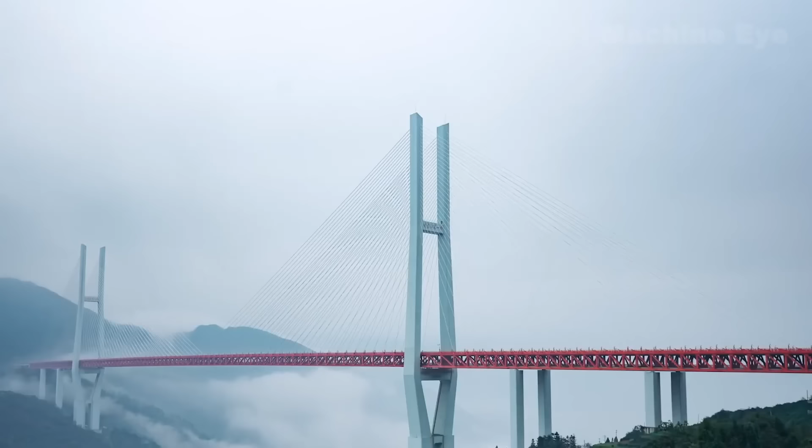Have you ever wondered how, in just a few decades, China transformed from having nothing into a global infrastructure powerhouse? The answer is hidden in this land bustling with activity. China, hailed as the infrastructure maniac, Chinese engineers have written their own legend through a series of world-shocking megaprojects. The once arrogant United States, upon witnessing China's true infrastructure might, had no choice but to bow down. They knew that many of the projects China built were simply beyond American capability.

Former US President Trump once openly declared that America would never be able to compete with China.

I love China. People say, oh, you don't like China. No, I love them. But their leaders are much smarter than our leaders. And we can't sustain ourselves. China, you go there now, roads, bridges, schools, you never saw anything like it. They have bridges that make the George Washington Bridge look like small potatoes. And they're all over the place.

When it comes to constructing large-scale projects, China literally clears mountains and builds bridges over waters, forging ahead through every obstacle just to create one engineering marvel after another. So, just how incredible is China's strength in infrastructure? And what untold secrets lie behind the nation's cutting-edge construction technology for mega-projects? In this video, we will delve deep into the stories behind China's giant engineering feats.

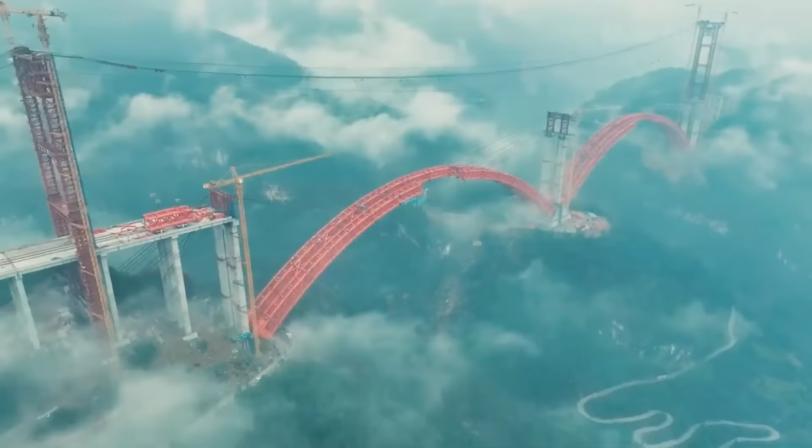As one of the world's largest developing countries, China has long driven its economic and social development through infrastructure. Its engineers are like superheroes in the field of construction, dedicated to creating monumental projects that meet the demands of a continually growing population. From the Baihetan Hydropower station rising from the banks of the Jinsha River to the spiraling tunnel of the Yaxi Expressway that seems to float among the clouds, from the world's highest Qinghai-Tibet Railway to the Hong Kong-Zhuhai-Macao Bridge spanning the Lingdingyang, from the hellish difficulty of the Sichuan-Tibet Railway to the 50-meter deep tunnel under the Pearl River estuary, Chinese engineers have redefined the limits of human infrastructure with projects once thought impossible.

While Americans were still embroiled in debates over repairing century-old bridges, China was reshaping the surface of the Earth by constructing 16,000 kilometers of highways and 4,000 kilometers of high-speed rail each year. When China's railway network in 1949 measured only 21,000 kilometers, with half of it in disrepair, who could have imagined that 75 years later, the nation would weave a traffic network spanning 45,000 kilometers of high-speed rail and 180,000 bridges, enabling people to travel thousands of miles in a single day?

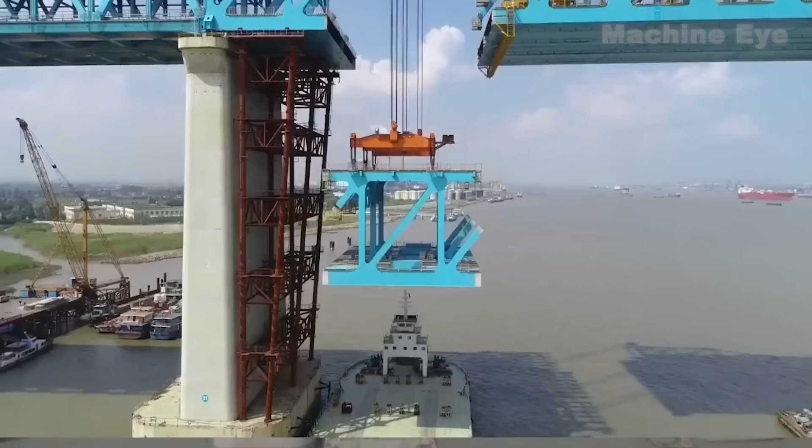Behind these achievements lies an Eastern wisdom that has upended Western perceptions. During the construction of the Hutong Yangtze River Bridge, China developed a specialty steel possessing a tensile strength of 500 MPa, equivalent to a steel cable as thick as a chopstick lifting 3 main battle tanks. This breakthrough in material means that a cable-stayed bridge designed for both road and rail, with a 1,092-meter main span, is no longer merely a theoretical concept. As the world's first road-rail cable-stayed bridge with a main span exceeding 1,000 meters, it not only serves as the golden link of the Yangtze River economic belt but also stands as the pinnacle of Chinese infrastructure innovation.

The bridge features a main span of 1,092 meters, with two 330-meter high diamond-shaped main towers soaring into the sky, equivalent in height to a 110-story building. These towers bear an axial force of 300,000 tons, functioning like the mythical sea-calming needle that stabilizes the waters, their foundations firmly anchored in the riverbed.

To conquer the complex hydrological environment of the lower Yangtze River, engineers pioneered a groundbreaking precision positioning technology for a 15,000-ton steel caisson. They constructed a colossal caisson foundation spanning 5,100 square meters on the dynamic, sediment-laden riverbed, equivalent in area to 12 basketball courts, setting a world record.

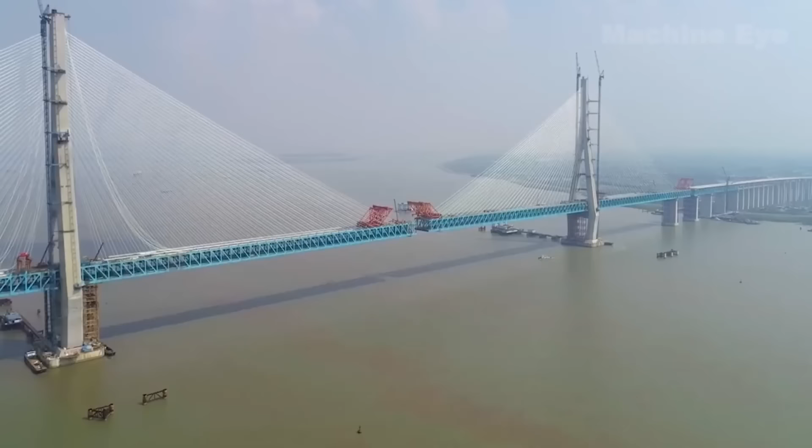The bridge employs self-developed ultra-high-strength steel that surpasses conventional materials in strength, paired with 2,000 megapascal grade stay cables. This steel and concrete framework supports a superload of 480,000 tons of steel and 2.3 million cubic meters of concrete, equivalent to the steel used in 12 Bird's Nest stadiums and the concrete volume of 8 national grand theaters.

By reducing the travel time between Nantong and Shanghai from 5 hours to just 1, the Hutong Yangtze River Bridge has revitalized the Yangtze River Delta's transport network, effectively unblocking the region's critical arteries like the meridians in traditional Chinese medicine. The bridge carries the Tongxi Expressway, Husutong Railway, and Tongsujiayong high-speed rail, handling over 100,000 vehicles daily and 80 million tons of annual freight, forming a super corridor linking coastal economic zones.

Its 1,092-meter-wide main channel accommodates 100,000-ton vessels, achieving harmonious coexistence of maritime and land transport. International netizens marveled at the spectacular steel beam closure process.

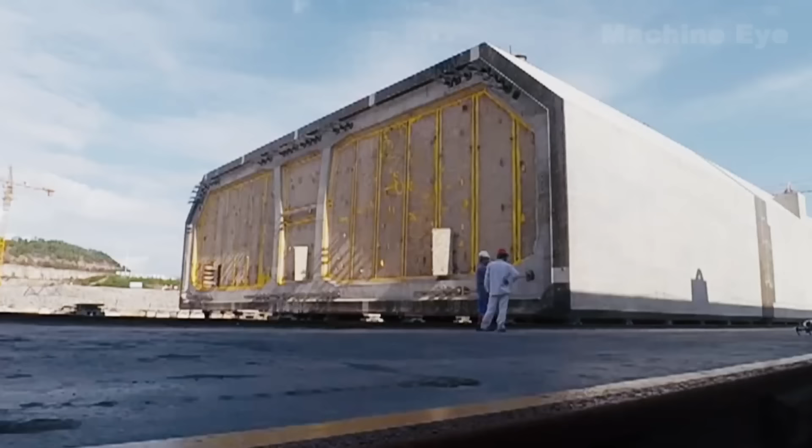At Zhuhai's Niutou Island, in the world's largest immersed tube prefabrication facility, 33 massive tube sections were quietly produced. Each section is 180 meters long and weighs 74,000 tons, comparable in scale to a medium-sized aircraft carrier. Engineers pioneered the curved immersed tube factory method, fabricating curved tube sections with a radius of 5,500 meters to millimeter-level precision, breaking free from the limitations of straight-line production.

Once towed from the prefabrication yard to the construction site, these tubes must navigate complex ocean currents. A formation of 8 high-powered tugboats, coordinated by satellite positioning and an intelligent control system, precisely delivered each tube section into position. Then, harnessing the buoyancy of water, the immersed tube gently descended 44 meters to its seabed foundation trench. Through China's independently developed deep-water unmanned installation system, an astonishing joint tolerance of merely 3 millimeters was achieved between tube sections, a precision feat lauded by international media as 'the subsea kiss of perfection.'

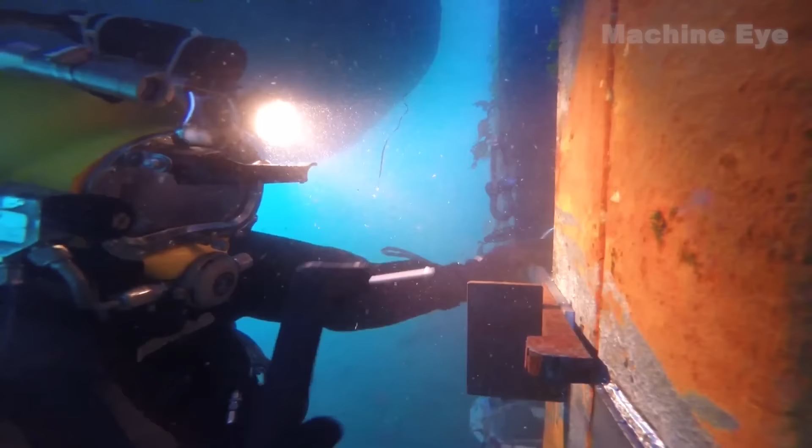Traditionally, immersed tubes rely on risky underwater welding to ensure watertight seals. Chinese engineers pioneered a revolutionary active compression sealing technology. They installed retractable steel bulkheads at tube ends, employing hydraulic systems to actively compress rubber gaskets, transforming manual processes into mechanized operations that guaranteed absolute water impermeability.

This innovation enabled the final joint installation to be completed in just 1 day, achieving a 10-fold efficiency improvement. To monitor the immersed tube's positioning, engineers deployed high-precision, microelectromechanical gyroscopes and tilt sensors, capturing ultra-low-frequency motion data in real time. This ensured the 33 tube sections fit together with the precision of interlocking building blocks.

At both ends of the tunnel, the artificial islands feature steel cylinder retaining structures. 120 steel tubes, each measuring 22 meters in diameter, are driven deep into the seabed, forming a robust foundation that withstands ocean currents and typhoon forces.

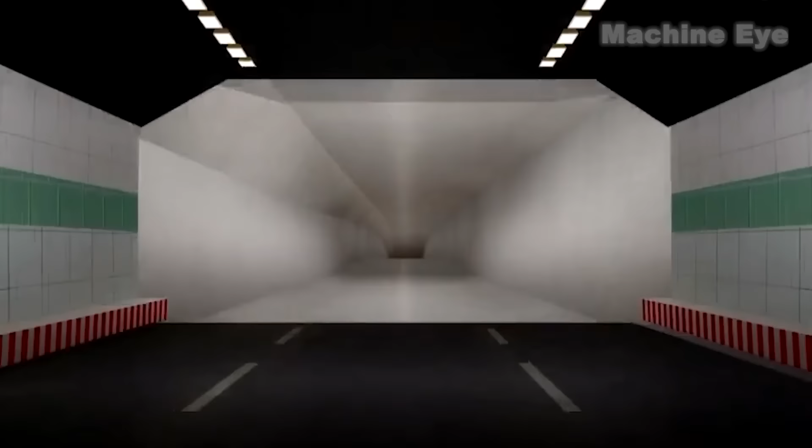From the Øresund Strait in Denmark to Busan in South Korea, no immersed tunnel worldwide had ever exceeded 3.5 kilometers until the Hong Kong-Zhuhai-Macao Tunnel rewrote history with its staggering 6.7-kilometer span. International media marveled: 33 colossal tubes aligned on the seabed with a cumulative error less than the width of a human hair. Chinese engineers have redefined the limits of deep-sea engineering.

More than a physical passage, this tunnel symbolizes China's transformation from an infrastructure follower to a standard setter. Through this 6.7-kilometer undersea marvel, China demonstrates that its engineering prowess can tame the vast oceans, inscribing a new chapter in the annals of human engineering.

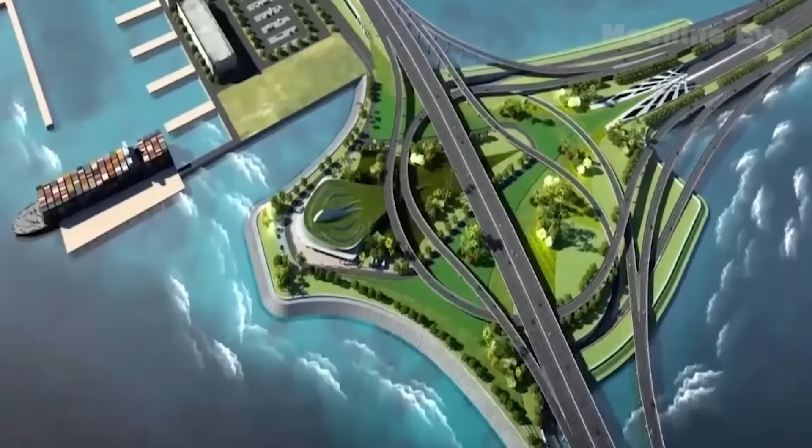In addition, Chinese engineers have constructed another colossal engineering project that has astonished the world: the Shenzhen-Zhongshan Link, an engineering colossus spanning turbulent waters. A core transportation hub project in the Guangdong-Hong Kong-Macao Greater Bay Area, stretching 24 kilometers in total, this project is an integrated cross-sea engineering feat combining bridges, islands, tunnels, and underwater interchanges, including an undersea tunnel that spans approximately 6.8 kilometers.

In this tunnel, engineers embedded 23,000 fiber optic sensors within the immersed tubes, allowing the concrete to sense stress changes in real time, much like human nerves. This technology is 40% more sensitive than its Western counterparts, prompting even the journal Nature to exclaim, 'The Chinese have taught concrete how to think.'

Next, we will examine in detail how Chinese engineers built this undersea tunnel. This tunnel, 6.8 kilometers long, is designed with 8 lanes in each direction, 2 more lanes than the Hong Kong-Zhuhai-Macao Tunnel. It is composed of 32 giant immersed tubes and a final joint, buried more than 40 meters beneath the sea. When Dutch immersed tube specialists declared an 8-lane bidirectional configuration impossible, Chinese engineers staged a subsea engineering marvel in the Pearl River estuary.

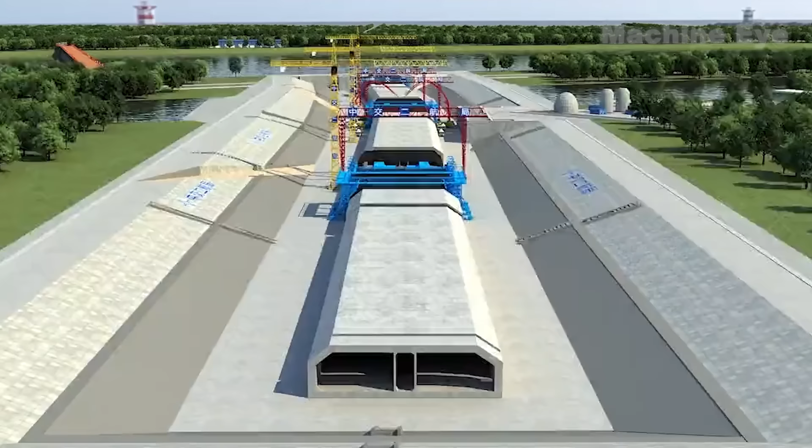Deploying an innovative steel-concrete sandwich composite structure that defied Western engineering conventions, Chinese engineers overcame the challenge. Traditional immersed tube tunnels typically employ cast-in-place reinforced concrete, a process that is both labor-intensive and time-consuming.

For the Shenzhen-Zhongshan Link's undersea tunnel, engineers adopted a steel shell design. However, the 8-lane configuration significantly widens the tube structure, with each additional lane increasing hydrostatic pressure by 27%, approximately 20,000 metric tons per lane. This equates to bearing the combined weight of 15,000 sedans. Compounding this challenge, the overhead navigation channel accommodates 10,000-ton cargo vessels. The dual pressures from hydrostatic forces and shipping loads create a structural conundrum akin to crushing forces on a beverage can, potentially causing tunnel deformation.

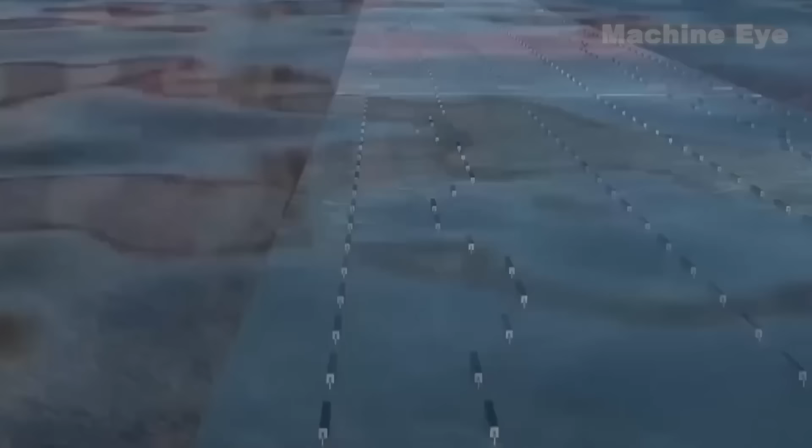After thorough research and verification, Chinese engineers decided to use a steel shell concrete structure. The process begins with fabricating the tube's steel shell, followed by concrete infilling, a composite construction method that significantly enhances compressive strength while eliminating traditional rebar tying. This innovative hybrid structure achieves a 400% increase in flexural rigidity, a breakthrough so transformative that the American Society of Civil Engineers has incorporated it into their latest design specifications.

The immersed tube is manufactured in an automated facility, where steel plates are precision cut into various profiles, then robotically welded. Intelligent welding robotic arms achieve 0.02 mm seam alignment accuracy, the error being only a third of a human hair's thickness. Certification testing by Germany's TÜV Rheinland confirms that the weld quality exceeds DIN 6700 standards by 22%.

Due to their enormous size, each tube is divided into 22 segments. After each segment is completed, a gantry crane assembles them, followed by final assembly work by the crew.

Besides the robust and watertight exterior, ensuring that the tube remains corrosion-free for 100 years underwater is key. After the steel shell is completed, its surface is sprayed with 5 layers of anti-corrosion coating with a molecular structure that mimics shark skin, leaving no foothold for algae or bacteria. Each tube is then equipped with 552 sacrificial anodes, ensuring that under their protection, the tube can be safely used for a century. Next, the tube is transported to another facility for the final concrete pouring.

The underwater immersed tubes of the Shenzhen-Zhongshan Link are designed with a steel shell concrete structure. Once the steel shell is completed, its inner chamber is filled with concrete. The total volume of concrete for 32 tubes exceeds 1 million cubic meters.

At this point, manual labor could no longer keep pace, necessitating the use of intelligent concrete pouring robots. These robots autonomously move along predetermined routes on the tube's top slab, automatically detect and drill holes, and perform the pouring operation entirely on their own. Using 1,200 sensors to continuously regulate the concrete's flow rate, these smart robots compressed a process that traditionally took 90 days into just 28 days.

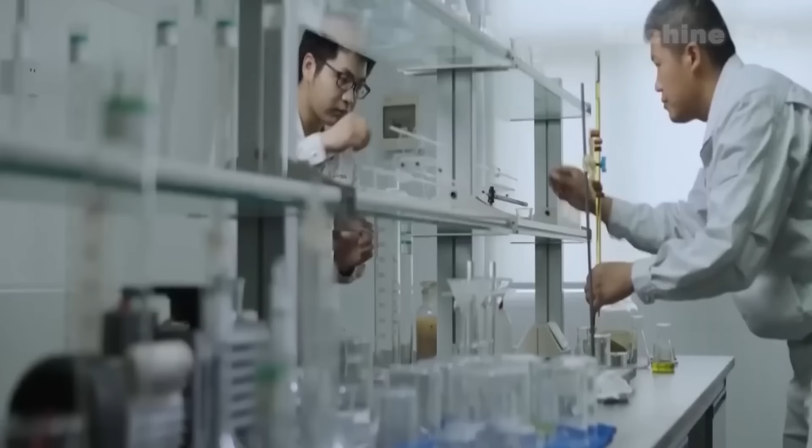Even more astonishing is the zero manual vibration technique. Self-compacting concrete flows like melted dark chocolate into every crevice with nanometer-level precision, comparable to the intricate distribution of capillaries in the human body. To formulate the optimal composition ratio, engineers dedicated 3 years to systematic experimentation, even building a full-scale tube module to simulate the tube's ability to withstand more than 1,000 typhoons and resist a level 9 earthquake.

The tests also simulated a scenario in which sea levels rise by 3 meters by 2075. This die-before-rebirth Eastern philosophy reduced the project risk by 83%. These simulation tests effectively validated the reliability of using this specialized concrete in the immersed tubes.

Although this concrete's strength and flowability meet the requirements for casting the tubes, once it leaves the batching plant it must be poured within 90 minutes. This critical requirement led to the creation of an intelligent manufacturing facility capable of casting 1 tube section per month, earning its reputation as the Smart Dream Factory for immersed tube prefabrication.

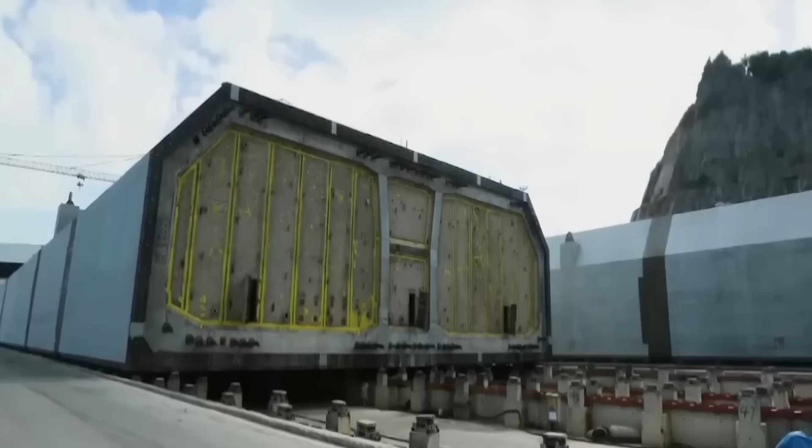A complete steel shell immersed tube weighs as much as 80,000 tons. Moving it a mere 200 meters to the departure area is no small feat given its massive weight. With 200 transport vehicles and over 1,000 steel wheels, the 80,000-ton tube was slowly moved and transferred in just 4 hours, a task that used to take 7 days for a tube of similar mass.

Before a tube can be brought in or out, workers must conduct final inspections. Using millimeter precision, non-destructive testing equipment, the density of the concrete can be assessed without damaging the steel shell. Once approved, the tube is fitted with a ballast water tank and steel sealing doors, then maneuvered by buoyancy into a deep water dock. Next, it is ready for installation.

How do you excavate a 5-kilometer-long, 330-meter-wide deep-sea trench 40 meters below the surface? The answer lies in the choice of construction machinery.

In the undersea tunnel section of the Shenzhen-Zhongshan Link, the seabed is scattered with uneven weathered rock. Before laying the immersed tubes, the seabed must first be leveled. This is where specialized drilling tools come in. A 35-ton drilling hammer, weighing as much as 3 main battle tanks, free falls to shatter granite.

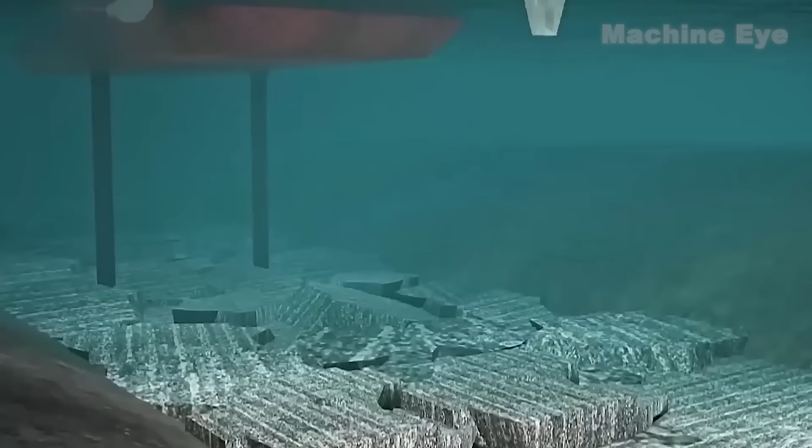Each impact releases energy equivalent to 2.5 kilograms of TNT, yet it can control the trench's precision within plus or minus 4 centimeters, more stringent than the installation standards for benches in New York's Central Park.

Meanwhile, another vessel uses a powerful grab bucket to clear out rubble. If excavating the trench is like laying a bed for the tubes, then throwing and leveling stones is like adding a mattress, a crucial step to ensure the precise alignment of the tunnel's tube sections.

The Jinping No. 2 leveling vessel is the star of this phase. Upon reaching the exact location of the tunnel, 70-meter-high support pillars are driven into the seabed for positioning, and rubble is transported via conveyor to the stone-laying pipe. The discharge outlet then lays the stone evenly at a regulated speed on the seabed, maintaining precision within 4 centimeters. Every 4 days, the leveling work for 1 tube section is completed.

Once the tunnel's trench is prepared, the world's first integrated floating and installation vessel, Jinan No. 1, sets sail carrying an 80,000-ton immersed tube out of the dry dock. At 1 o'clock in the morning, Jinan No. 1 successfully reached the lowering position.

Under the guidance of cables, the tube was slowly lowered until it reached the trench, where it was connected to the previous tube section via pole rods. To ensure installation accuracy, divers went underwater to transmit real-time images. After a final hour of fine-tuning, the deviation at the joint was reduced to an astonishing 0.8 millimeters, thinner than a human eyelash, breaking the world record for underwater immersed tube alignment.

Dutch supervisor Janssen recorded in his log, "This is the Apollo moment of engineering."

Now that the Shenzhen-Zhongshan Bridge is fully operational, a brand new landmark mega project spans the Pearl River estuary. When the first car's headlights pierced the darkness of the undersea tunnel, it was not just the rebirth of a transportation artery, but an epic dialogue between humanity and the ocean.

Chief Engineer Song Shenyou told reporters, "We spent 16 years turning a wild idea on paper into a routine reality that millions cross every day." Regarding this project, the chief engineer further elaborated.

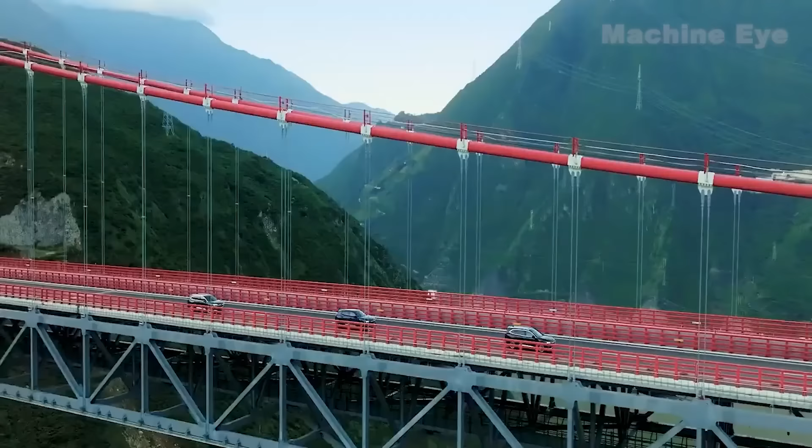With its global leading scale, complexity, and speed, Chinese infrastructure has become a shining national card that captures the world's attention. From the lofty Yaxi Expressway to the bridges and tunnels carving through the towering mountains of Sichuan and Chongqing, breaking 7 world records along the way, China has turned natural obstacles into thoroughfares for economic and social development, significantly improving people's livelihoods and paving the way for rural revitalization.

The Hong Kong-Zhuhai-Macao Bridge is the most technologically complex, challenging, and massive bridge in the history of road construction, setting multiple world records and establishing core technologies with independent Chinese intellectual property rights.

In 2024, with the opening of the Shenzhen-Zhongshan Bridge and the Huangmaohai Cross Sea Bridge, the Greater Bay Area will realize the one-hour living circle. Roads and bridges have shattered the constraints of time and space, fostering coordinated socio-economic development.

The expansion of China's railway network and breakthroughs in independent research and development have dramatically transformed the lives of its people. In a country boasting the world's largest high-speed rail and highway networks, traversing thousands of miles in a day is now a part of daily life.

Have you ever imagined that a ship could sail over mountains? And this isn't like something out of a movie or a dream, it's a reality. You can turn your fantasies into reality. And to do so, you must come to China.

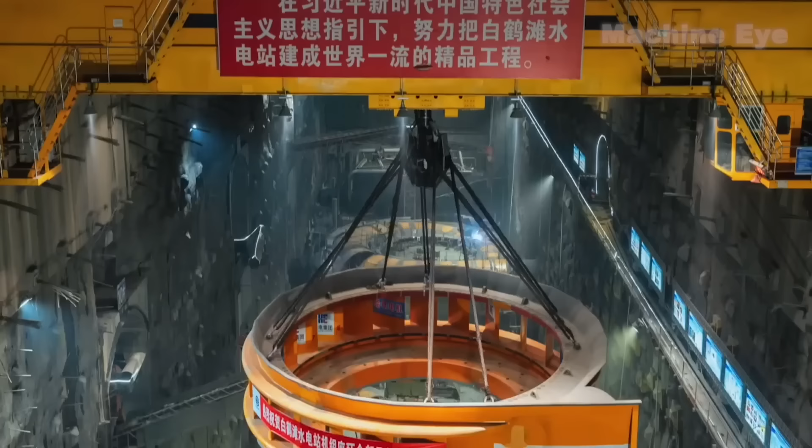In the modern world, all of this is only possible thanks to dams and hydropower systems. Approximately 1/3 of the world's installed hydropower capacity comes from China. This is not surprising, as there are countless hydropower stations in the country, some of which have even set world records.

For example, in China there is a dam called Baihetan, one of the largest hydropower stations on our planet, with an installed capacity reaching 16 million kilowatts. Its scale is enormous and its annual power generation is truly remarkable.

Although its installed capacity is lower than that of the Three Gorges Dam, it still ranks as the second largest hydropower station in the world. In fact, the world's top 5 hydropower stations are all Chinese projects.

In this country, people can actually make ships sail over mountains. In today's video, you will learn how Chinese engineers accomplished this feat.

They used ship lifts to turn fiction into reality. This is the Goupitan hydropower station.

The dam stands 232.5 meters tall, and the total lift height of the ship lift reaches 199 meters, equivalent to 66 stories. Ships are raised in 3 vertical stages to bypass the dam, traveling directly from the lower to the upper reaches of the Wujiang River, making it one of the world's largest ship lifts.

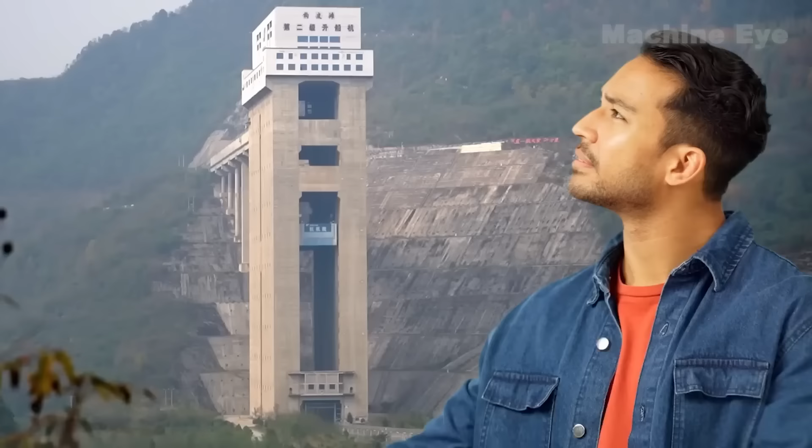So how does this ship lift actually operate? First, a 500-ton vessel enters a gigantic ship-carrying chamber measuring 40 meters in length and 12 meters in width. The chamber is flooded with water to create a moving waterway. It is towed by 256 steel cables and is raised and lowered vertically via a gear rack climbing system, with each stage taking about 30 minutes.

The ship must ascend through 3 levels of the ship lift, taking a total of approximately 2.5 hours, reducing the journey by 4 days compared to traditional winding mountain routes.

Employing a world-first gear rack plus nut column safety system that can withstand an 8-level earthquake in extreme wind and waves, the lift's precision is maintained within plus or minus 10 millimeters, ensuring that 500-ton class vessels can traverse the mountains smoothly.

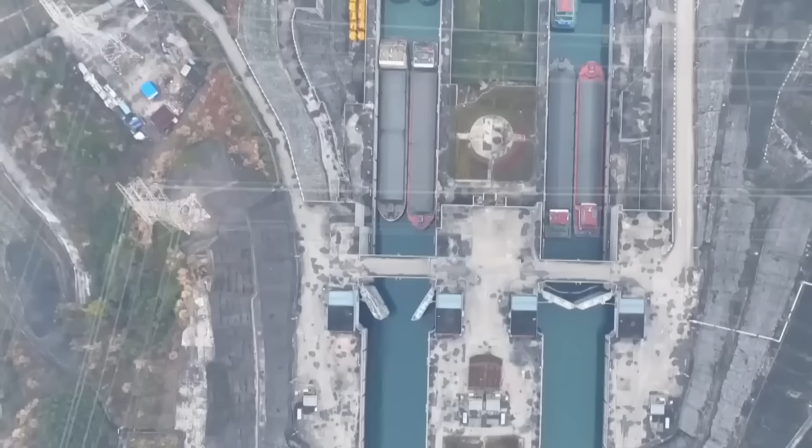This project has restored full navigation along the Wujiang River, opening up the golden waterway that connects Guizhou to the Yangtze River, increasing annual freight capacity to 5 million tons, and boosting the development of the Central Guizhou Economic Zone. The International Shipping Association has even described it as redefining the possibilities of inland navigation.

However, the designers claim that this ship lift can raise and lower a 500-ton vessel in about 10 minutes. In other words, a standard passenger ship can easily depart from its original position in such a short time.

The massive lift has a maximum load capacity of 18,800 tons. Even though a vessel might take a bit longer to be fully raised, hardly anyone cares because any waterborne vehicle will be lifted to an astonishing 72-meter height. Incidentally, this height can vary depending on the downstream water level, with a maximum lift of up to 200 meters.

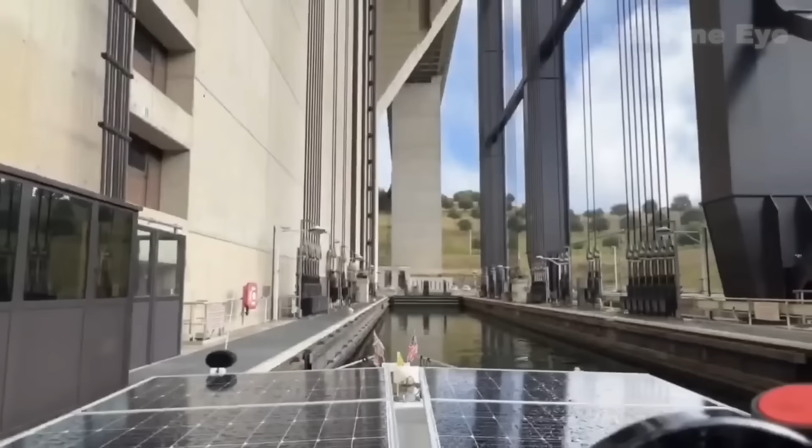Some have even called the ship lift system at the Goupitan Dam an incredible feat of engineering. Of course, such praise is open to debate, since ship lifts have been implemented in various parts of the world for some time. However, you will notice that this system does not consist of a single elevator.

It actually comprises 3. Following the first elevator is a second one that raises vessels to a height of 130 meters. Its operating principle is straightforward: the ship enters, waits for the system to activate, and is then raised as a whole.

Through the Goupitan Dam's lift system, the water surface of the entire shipping channel is elevated to 199 meters, simply unbelievable. To put this in perspective, the height to which a ship is lifted is equivalent to that of a 66-story building. If you were near the Great Pyramid of Giza, you'd see that its height is 139 meters, while the Statue of Liberty in the United States stands only 93 meters tall.

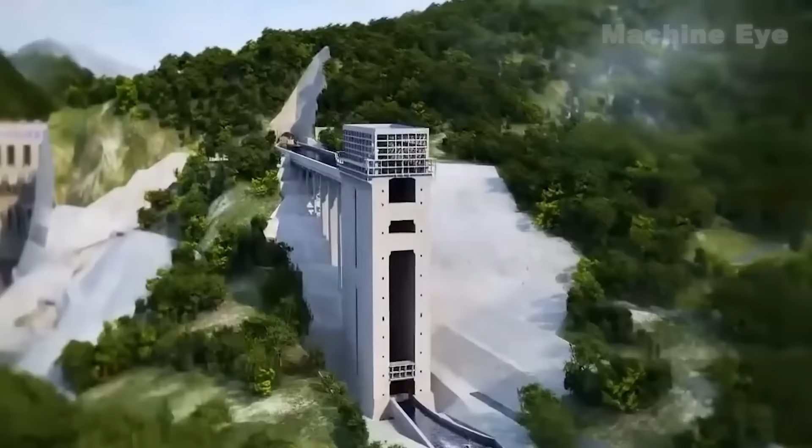This makes one truly admire the ingenuity of Chinese engineers, as a lift height of 199 meters is almost unimaginable. Under normal circumstances, a river with such a dramatic elevation drop would be non-navigable. Yet, through advanced engineering techniques, the Chinese have achieved this astonishing feat, earning them the well-deserved nickname Infrastructure Maniac.

Moving on, after a ship passes through 2 of the elevators, it must then be lowered in some way to reach the water behind the dam. To accomplish this, the system includes an additional elevator at the end of the mountain route, with a maximum lowering height of up to 47 meters, again depending on the water level.

Incidentally, in terms of throughput, this system might appear rather rudimentary. Although the ship is raised relatively quickly, it can accommodate only one vessel at a time, meaning that the elevator system's capacity is not very high. In fact, it might even lead to long queues waiting for the elevator.

However, once one ship passes through the first elevator, the next can immediately be raised. While this arrangement is not perfect, the design engineers have done their utmost to expedite transportation along this single route, comprising 3 elevators and a section of water conduit. The system makes elevation changes extremely simple and undoubtedly represents yet another astonishing achievement of Chinese engineering.

There remains a certain distance between the elevators that must be traversed, but in this case, it poses no significant challenge. Traditionally, locks are used to transfer vessels between different elevations without needing to cross mountains. Multi-level elevation changes are typically achieved by installing several locks that slowly raise or lower a ship step by step. However, here the vessels must navigate among mountains.

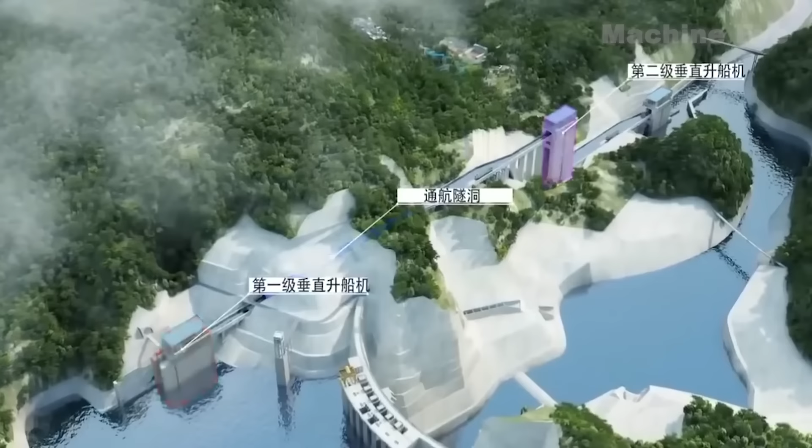Initially, there was no river beneath the elevator system at all, so in addition to constructing the 3 elevators, another feat had to be accomplished: laying a passage between them. Ultimately, the main passage between the 2 elevators and the mountain is an open water conduit. This does not mean that building such a passage is uncommon. Ancient engineers achieved similar feats without modern high-tech. But in this case, integrating the waterway system with rugged mountain terrain and the entire elevator system greatly increased the challenge. Nonetheless, Chinese engineers successfully overcame these difficulties, completing the second mountain crossing route.

In fact, you need not even wonder how China managed it. The country has accumulated considerable experience in tunnel construction, using giant tunnel boring machines to excavate tunnels so that everything is completed as planned. As a result, a mountain route spanning 2.3 kilometers was born. The entire project cost a staggering $7.775 billion, and it is precisely because of this ship lift system that vessels are able to traverse the most perilous terrain. If a more traditional lock system were used, each ship would undoubtedly encounter far more difficulties during its journey.

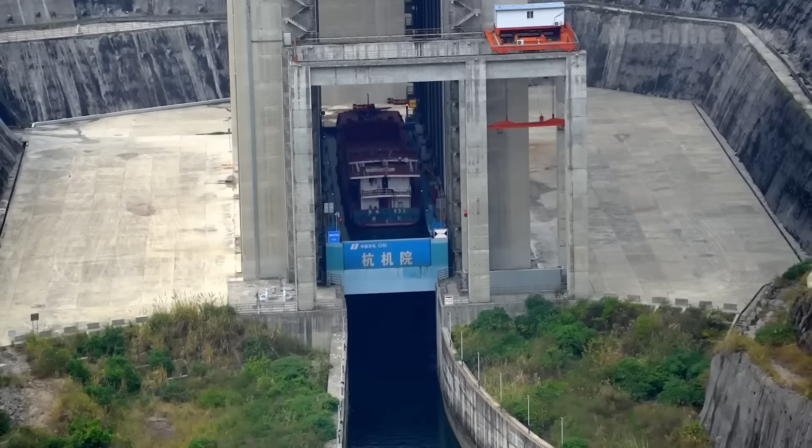You may have already realized that the water conduit and elevator system were built specifically because the Goupitan Dam is located in this region. This ship lift system is one of the fundamental supporting facilities of the dam. In summary, the Goupitan Dam and its hydropower station are not particularly remarkable in themselves. The only unique aspect is their highly advantageous navigation system, which allows ships to effortlessly fly over mountain ranges.

This raises another question: why did China need such an enormous investment, consuming vast amounts of effort, time, and capital, to build this system, especially when the project itself doesn't seem all that grand? First, let's take a look at the location of the dam and its navigation system. For ships, this area is narrow and environmentally harsh, to the extent that using a traditional lock system was simply not feasible. It's worth noting that after the completion of the Goupitan Dam, Chinese engineers undertook significant work overall.

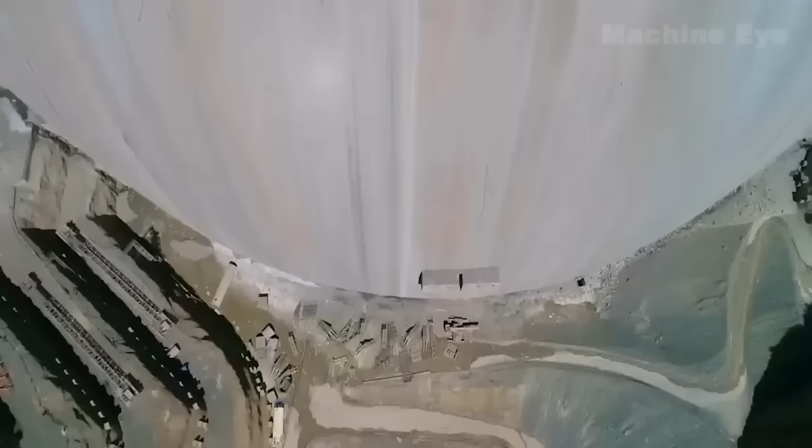Building any dam creates a barrier in the river, causing water to accumulate on one side and leading to a rise in water levels on the other. Although in some places, this difference in water levels might not be very noticeable, in the case of the Goupitan Hydropower Station, the water level difference is so immense that designers had to abandon a single ship lift system, as lifting ships in such a manner would not only be time-consuming but also extremely dangerous. Therefore, constructing a dam and hydropower station in this context became essential, even though the project itself required enormous labor and substantial costs.

Considering the road construction in Guizhou's mountainous areas, it is nearly impossible to build wide highways suitable for large numbers of small trucks and tourist vehicles. Allowing trucks to navigate narrow mountain roads and bridges poses significant risks, since water transport exists, and barges and other cargo ships are more fuel efficient. Rail transport, while slightly better, faces its own challenges, such as the difficulty of laying tracks and the overall lower efficiency of rail freight compared to water transport.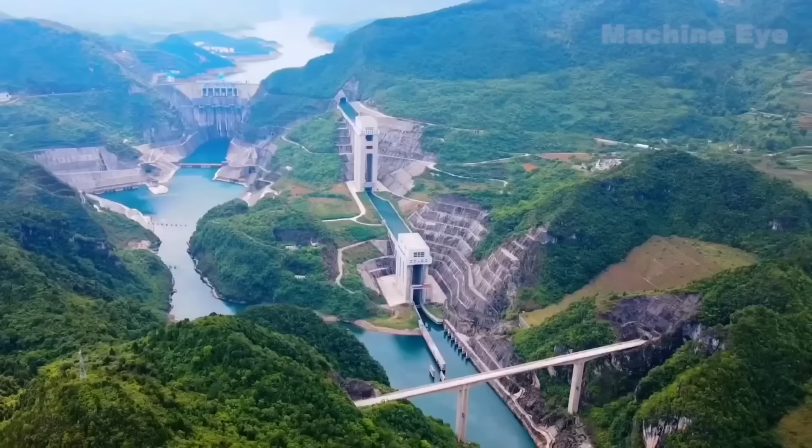Despite the various challenges associated with the ship lift system, this region has achieved the optimal solution through massive investment. As a result, we are able to witness such a spectacular sight and understand how real it is to sail ships through mountains. After all, a ship lift capable of hoisting 10,000 tons is itself an incredible feat of engineering. The completion of this engineering project has left a profound impression on netizens abroad. Many remarked, 'The ship lift alone is jaw-dropping.'

This navigation channel built on the towering bridge of the Goupitan hydropower station is a world-class aquatic viaduct with design and construction quality that's simply mind-blowing. And the water tunnel cutting through the mountains, that's pure genius. China achieves such incredible infrastructure for less than half the cost of a single Arleigh Burke-class destroyer, all while maintaining navigation on a major river.

What a bargain, others added, projects like this feel almost routine for China, yet they're engineering marvels. If this were in the US, it would take roughly 50 years to plan and another 50 years to build, if it ever got done at all. While some comments may be exaggerated, they undeniably reflect the staggering capabilities of China's modern engineering prowess.

Let's take a look at the ship lift at China's Three Gorges Dam. This lift system can hoist ships weighing up to 3,000 tons, completing a round trip in just 40 minutes, numbers that are staggering on their own. As the saying goes, with great power comes great size. The lift's chamber measures 122 meters in length and 18.3 meters in width, holding a volume of water equivalent to 4 Olympic-sized swimming pools. Its colossal scale allows it to accommodate nearly any vessel at maximum capacity.

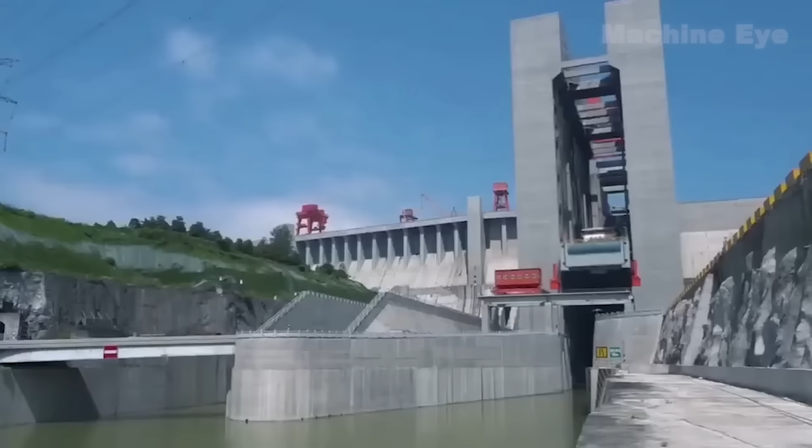Imagine lifting a ship of such immense weight to a height of 113 meters above the ground. It's an almost unbelievable feat, but raising such an enormous weight to a sufficiently high altitude with a single lift is in itself an extraordinary achievement, and we cannot overlook the brilliant ingenuity of Chinese engineers.

Chinese engineers have also put a great deal of effort into safety. They have installed 4 sets of symmetrically arranged drive mechanisms, equipped with gears and supports that firmly reinforce the 4 corners of the ship's cabin. This setup effectively eliminates the adverse effects caused by the tilting or swaying of the water inside the cabin, and it greatly reduces the risk of capsizing.

The designers have also ensured that even in emergency situations, such as during an earthquake, the system remains safe, because the lift cabin is equipped with cushioning devices that absorb vibrations and shocks. A construction expert involved in the project highlighted the seismic protection system: it dissipates seismic forces across multiple support pillars, preventing chamber collapse and other catastrophic failures.

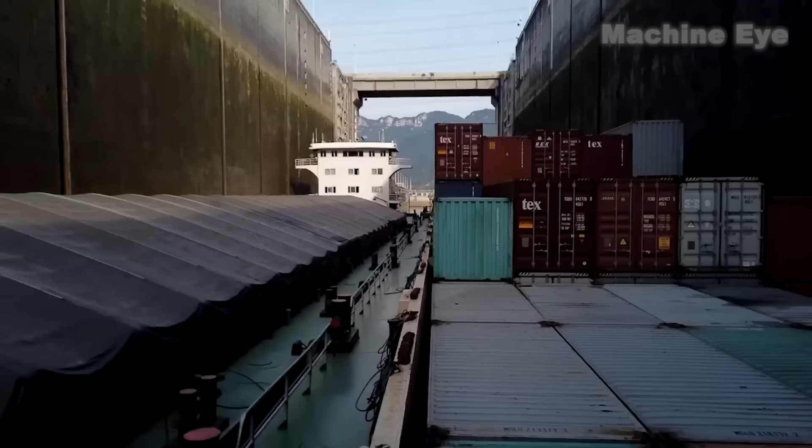Since the commissioning of the multi-stage lock system at the Three Gorges Dam, its benefits have already begun to emerge. According to media reports, the dam's cargo throughput reached 100 million tons in the first half of 2024, marking a 10.32% year-on-year increase and setting a new historical record for the Three Gorges locks.

Before the ship lift became operational, vessels still needed to traverse the dam, a process enabled by another engineering marvel, the 5-stage lock system. Installed adjacent to the dam are 2 parallel lock complexes, each consisting of 5 chambers, with a total transit time of approximately 4 hours. This time gap, 40 minutes versus 4 hours, is precisely why China is prioritizing the construction of a new lock system.

Such delays could severely impact individual businesses and even the broader Chinese economy, given that the Yangtze River serves as a critical maritime artery with no viable alternatives.

But just how impactful are these locks? Even with a 4-hour transit per vessel, the dam's annual cargo volume hit 180 million tons in 2024, and this figure continues to grow alongside China's economic expansion. Notably, initial projections estimated a maximum annual capacity of just 100 million tons, a number that has been clearly underestimated.

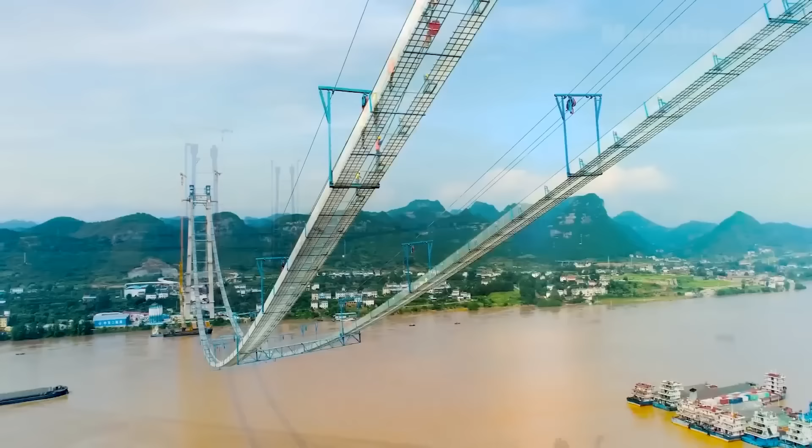Some say that China's development is an epic written in steel and concrete. From the natural barrier of the Yangtze River to the extremes of the Qinghai Tibet Plateau, from underground tunnels spanning 1,000 meters to bridges reaching the clouds, 1.4 billion Chinese have carved paths through mountains and tamed mighty rivers across 9.6 million square kilometers of land. They have etched the trajectory of a nation sprinting toward modernization.

In 2018, a colossal steel dragon leaped out of the Lingdingyang. This bridge stretches 55 kilometers, built over 6 grueling years by tens of thousands of workers, with 33 immersed tube sections connected with an accuracy of no more than 4 centimeters. The Hong Kong-Zhuhai-Macao Bridge, backed by 400 patents, answered the world's skepticism.

While the West claimed that complex geology made bridge building impossible, Chinese engineers used an integrated bridge island tunnel approach, reducing travel time from Zhuhai to Hong Kong from 4 hours to just 40 minutes. This is not just a bridge, it's a declaration of a nation breaking through its constraints. Cutting paths through mountains and building bridges over waters is never just a metaphor, it is the survival philosophy of the Chinese people.

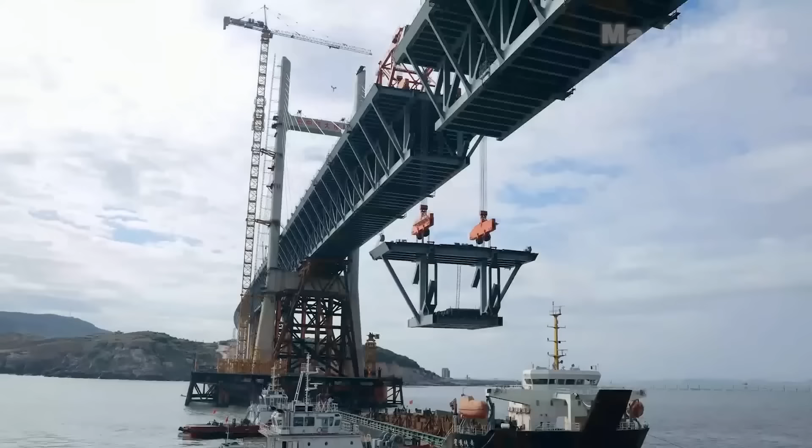In this video, we're diving into a topic that will set your heart racing: China's mega projects. These feats not only leave the world in awe, but have also transformed our daily lives. But do you know how they were built? What are the untold technological secrets behind them? Stay tuned, as today we unveil the mysteries of these extraordinary engineering marvels.

On this map of China, it's not highways or railways that crisscross the nation like veins, but rather, one bridge after another. To date, over 960,000 bridges of all kinds, highway bridges and high-speed railway bridges included, have been constructed on Chinese soil. In fact, nearly 45.2% of the 40,000 kilometers of high-speed railways are built on bridges. These marvels span towering mountains and rushing rivers, connecting towns and villages, making China a country of bridges. Truly, the title infrastructure maniac lives up to its name.

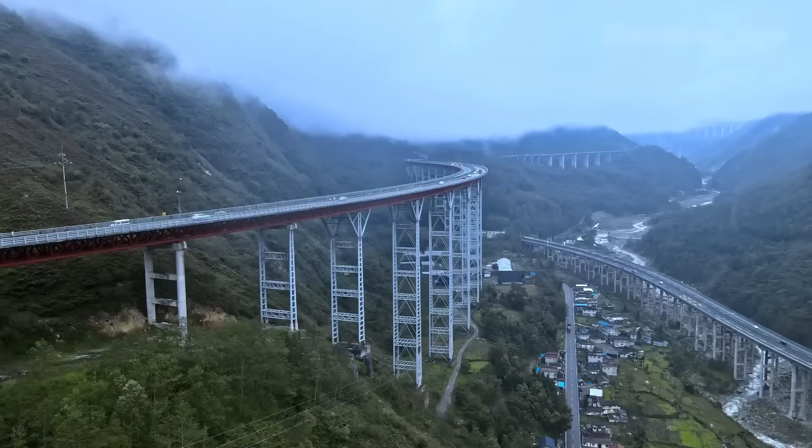When renowned British motoring expert Jeremy Clarkson first visited China, he was absolutely blown away by the country's infrastructure. Driving along China's highway bridges, he remarked, "In 1988, China had no motorways at all. And now, 30 years later, it has 84,000 miles of them. That's more than any other country in the world. And they're only just getting into their stride."

That's right. When it comes to bridge building technology, Britain simply can't compare to China. In the world of bridge engineering, there's a famous saying: for bridge construction, look to Europe and America before the 1970s, to Japan in the 1990s, and to China in the 21st century. Today, China's bridge construction has reached the world's top tier. Chinese bridges have become not only a shining postcard of China, but also an important symbol of its comprehensive national strength. Over half of the world's long-span bridges are built by Chinese engineers.

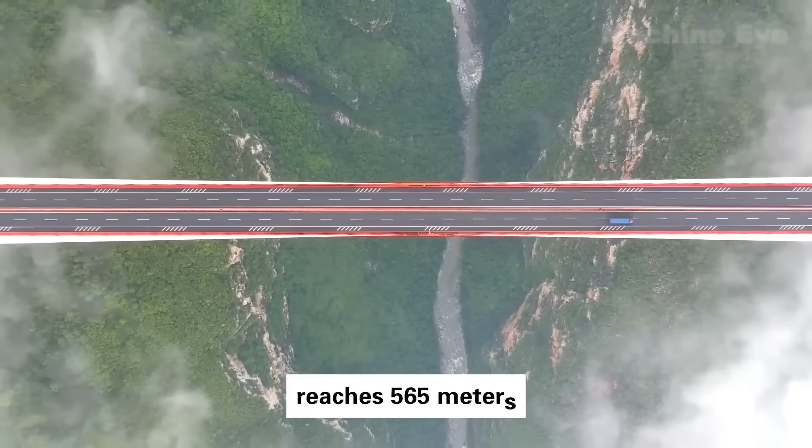The vertical distance, from the bridge deck to the valley floor of the Beipanjiang Bridge, reaches 565 meters, equivalent to 200 stories high. Building such a long-span bridge is no easy feat. The Beipanjiang Grand Canyon boasts treacherous terrain, complex geological conditions, and is subject to relentless winds, dense fog, and low temperatures. No one had ever thought it possible to construct a bridge in such an extreme environment.

Yet, Chinese engineers were not intimidated by these challenges. With ingenuity and courage, they overcame obstacle after obstacle. To build bridge piers on such steep cliffs, engineers invented the moving formwork system, assembling the piers section by section like building blocks. They also utilized smart concrete, a material that automatically adjusts its temperature to prevent cracking, ensuring the piers are both robust and durable.

The two concrete main towers of this bridge stand majestically, with the tallest reaching 883 feet, equivalent to the height of a 90-story building. The bridge deck is constructed from 22,000 tons of steel, with a total weight equal to that of 5 Titanic ships. The vertical distance from the valley floor to the bridge deck even surpasses the height of the New York World Trade Center, enough to fit an entire skyscraper.

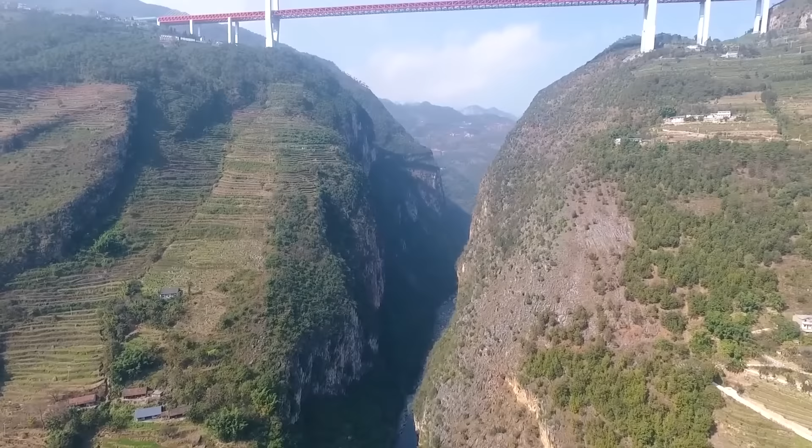The total length of the bridge's steel cables reaches 250 miles, which, if stretched out, could extend from New York City all the way to Washington, D.C. The entire bridge spans the canyon, measuring about 1 mile in length, while the highest point of the tower peaks at 2,461 feet. The height, from the valley floor to the tower's tip, is greater than the combined height of 2 Eiffel Towers, plus the Statue of Liberty. Such a scale of engineering and technical difficulty represents the pinnacle of human bridge building history.

This level of engineering and technical difficulty is not only a masterpiece in the history of bridge construction. The Beipanjiang Bridge began construction in October 2010 and officially opened to traffic in December 2016. Upon its completion, it immediately caused a global sensation. Major media outlets rushed to cover the story.

A walk across a new bridge in China could send your heart racing because it's the world's highest, and it opened today. It stands more than 1,800 feet above the valley below, and that's more than a third of a mile. The bridge cuts the drive time between two southwest Chinese cities from 4 hours to just 1.

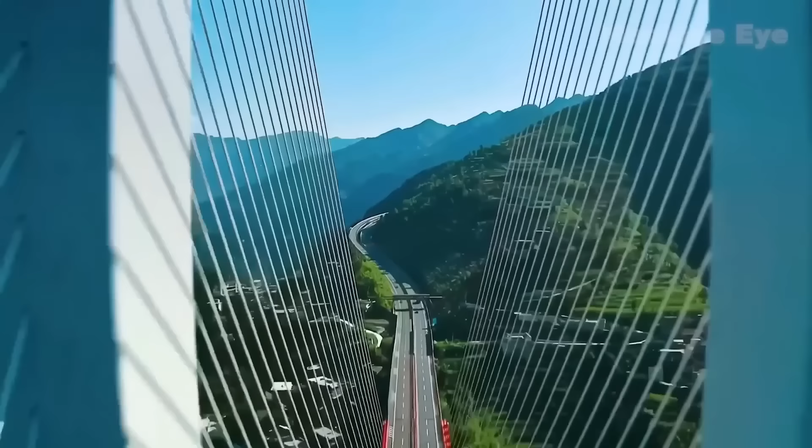John Davis, president of the American Society of Civil Engineers, admitted, if this bridge were built in the United States, it would take at least 20 years. Yet Chinese engineers completed this epic super project in just 6 years.

Such speed is extremely rare in the history of bridge construction. They even installed AI monitoring systems on both sides of the canyon to adjust the tension of the steel cables in real time. The sheer capability to execute such a massive engineering project makes it hard to believe that China is still considered a developing country.

It's simply more impressive than anything achieved by any developed nation. But the speed myth of Chinese engineers reached its peak with the reconstruction of an urban bridge. Next, let's take a look at how Chinese engineers built a bridge in under 43 hours.

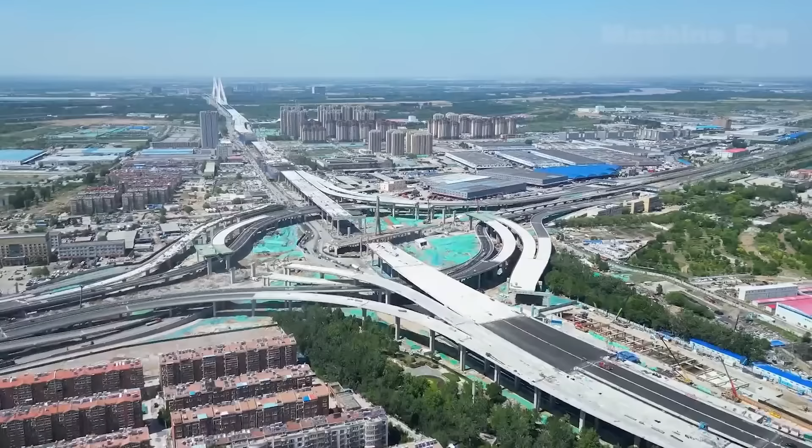That's right. This is the construction process of Beijing's Sanyuan Bridge back in 2015. Although 10 years have passed, it still leaves people in awe. The United States should learn from China on how to build bridges faster. I just hope that the US stops attacking China, but honestly, I think they're just jealous. Such high efficiency and top-notch construction simply can't happen in the US.

In 2015, the time-lapse video of Beijing's Sanyuan Bridge being rebuilt in just 43 hours quickly went viral worldwide. The video was only 30 seconds long, but its views skyrocketed. It captured the entire reconstruction process by Chinese engineers, from the start of construction to the full reopening of traffic, all completed in just 43 hours.

Foreign netizens were stunned. While praising China's incredible speed, they couldn't help but roast their own countries. An Indian netizen commented that such a project in India would take at least 5 years. An American netizen said that if this were in the US, it would take at least 20 years to complete.

Chinese engineers finished in less than 2 days what would take 20 congressional hearings and 50 revised blueprints just to start in the US. Another netizen jokingly claimed that in their country, such a project would require 3 presidential terms to complete. Another American netizen, after seeing this, was completely shocked.

He simply couldn't believe that China was able to build and put a bridge into use in just 43 hours. Because in the United States, building a simple bridge takes years. For example, a street light in front of my house burned out, and it took an electrician 5 months just to fix it.

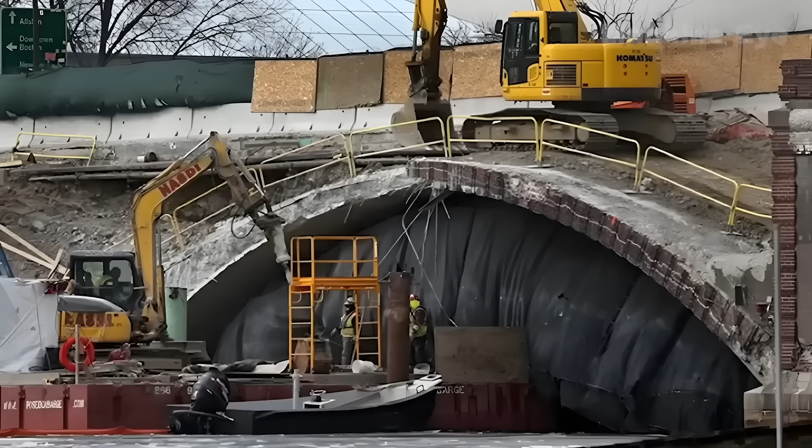To remind myself how astonished I should be, I occasionally look out the window in my office in Cambridge at this bridge which goes across the Charles River between the Kennedy School and Harvard Business School. In 2012, the state of Massachusetts said they were going to renovate this bridge. It would take 2 years.

In 2014, they said it wasn't finished. In 2015, they said it would take 1 more year. In 2016, they said it's not finished. We're not going to tell you when it's going to be finished. Finally, last year it was finished 3 times over budget.

The professor then talked about his trip to Beijing, where he drove past the famous Sanyuan Bridge. Now, compare this to a similar bridge that I drove across last month in Beijing. It's called the Sanyuan Bridge. In 2015, the Chinese decided they wanted to renovate that bridge. It actually has twice as many lanes of traffic.

How long did it take for them to complete the project? What do you bet? Take a guess. Okay, take a look. The answer is 43 hours. Now, of course, that couldn't happen in New York.

After these words, cheers erupted throughout the room. The audience's faces were filled with disbelief, staring at the professor in awe, as if saying, this can't be real. It was truly hard to believe.

The professor added that this was not just a triumph of technology, but also an organizational revolution. China has taken parallel engineering to the extreme, design, prefabrication, and demolition all happening simultaneously, compressing time to its physical limits. He also pointed out why China has become so powerful today.

Behind this speed and execution is a purpose-driven leader and a government that works. The most ambitious and most competent leader on the international stage today is China's President Xi Jinping. And he's made no secret about what he wants. As he said when he became president 6 years ago, his goal is to make China great again.

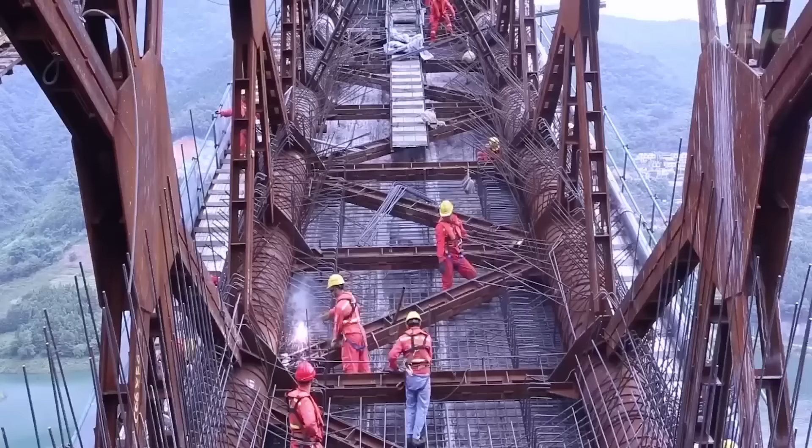China's speed is the speed of global development. Wherever the Chinese go, construction and progress follow. This is what true global leadership looks like. Time and time again, the speed of China's infrastructure projects has shattered the world's understanding of what is possible.

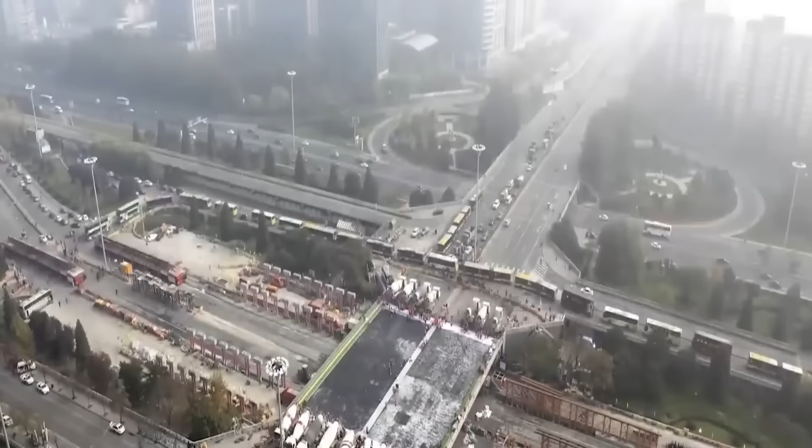So, do you know how Chinese engineers managed to complete this epic engineering project in just 43 hours? Let's continue. Beijing's Sanyuan Bridge is an interchange consisting of 3 main bridges, 5 ramp bridges, and 7 ramps. It is located at the junction of Beijing's East 3rd Ring Road and North 3rd Ring Road, serving as an important transportation hub in the city.

During peak hours, as many as 13,000 vehicles pass through in just 1 hour. The main bridge covers an area of 1,715 square meters, with a total length of 54.9 meters and a width of 44.8 meters.

After 30 years of service, the bridge was gradually becoming overloaded, and its surface began to show signs of aging and damage. Following detailed inspections by bridge engineers, it was determined that the bridge's load-bearing capacity had significantly declined. To ensure traffic safety and efficiency, China decided to reconstruct the Sanyuan Bridge.

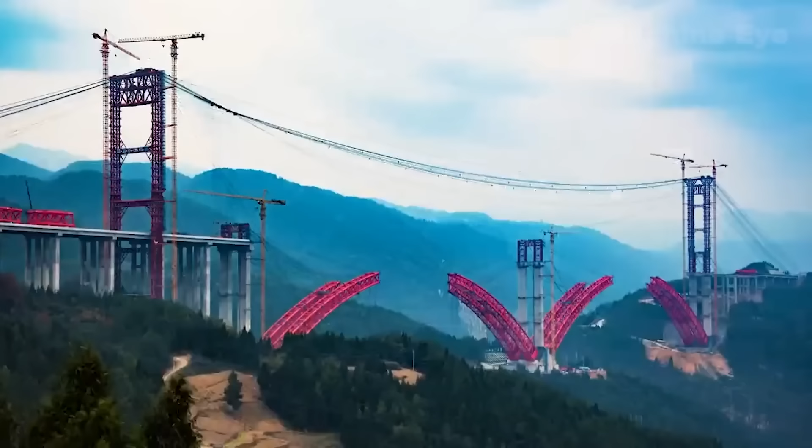Using traditional beam replacement methods would not only take a long time but also cause severe disruptions to Beijing's traffic. This approach was clearly not in line with China's infrastructure speed. So, the key challenge was, how can the bridge be reconstructed without affecting normal traffic? This was the main problem engineers had to solve.

After repeated research and demonstrations by bridge experts, Chinese engineers decided to adopt the bridge replacement method. This method is simple and effective: remove the existing old bridge and install the new bridge. While this might sound simple, the actual execution was a different story.

Although the entire project lasted 43 hours, the original construction plan aimed to complete the process within just 24 hours. So, what unexpected changes occurred during this period that caused the project to be delayed by a full 19 hours?

Before the Sanyuan Bridge project officially began, the Beijing Road Maintenance Group used a multi-dimensional platform to break down and reorganize every step of the construction process. Thousands of workers underwent countless 3D animation simulations to ensure that every stage of the construction was well understood.

In China, there is a saying, even with 100 careful plans, a single oversight can still occur. Despite such detailed pre-construction planning, unexpected challenges still arose during the on-site execution.

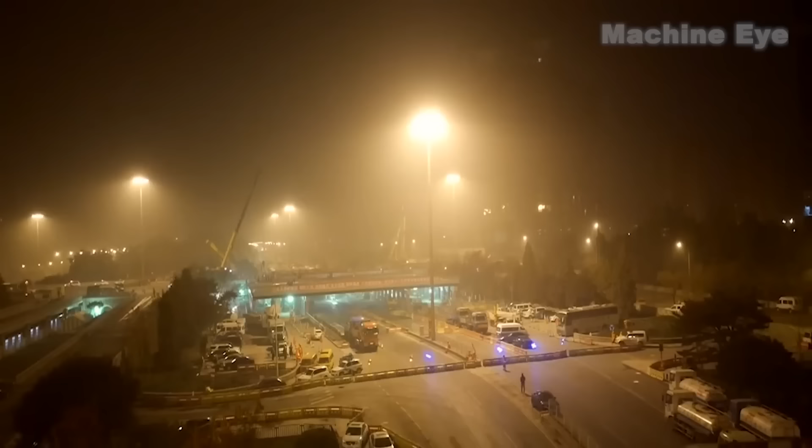At 11 p.m. on November 13, 2015, the Sanyuan Bridge reconstruction project officially began. The first step was to dismantle the old bridge. The original plan was to use 2 1,000-ton beam transporters to carry away the cut bridge sections directly.

However, an unforeseen issue occurred. The bridge deck's weight had far exceeded the transporter's carrying capacity. Although the transporters had a maximum load capacity of 2,000 tons, the bridge actually weighed 2,900 tons.

To solve this problem, engineers had to first cut and remove the 2 1,300-ton side sections of the bridge, then further cut them into smaller pieces for cranes to lift away. Finally, the central bridge deck was transported away in one piece. It was precisely this unexpected complication that caused the originally planned 24-hour project to be extended to 43 hours.

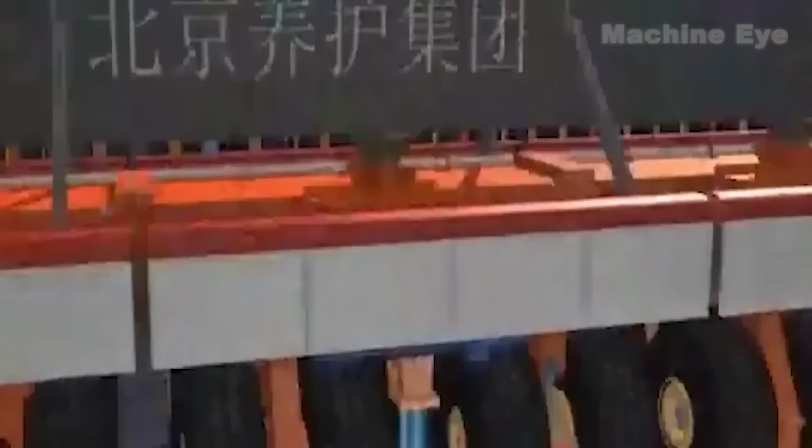Although dismantling the old bridge caused a delay, the most critical challenge was how to accurately place the new bridge in the exact position of the old one. Once the old bridge was moved to a temporary storage site, the new steel bridge, measuring 54.9 meters long and 44.8 meters wide, was transported into place.

However, an even greater challenge emerged. The placement error had to be controlled within 20 millimeters. For the engineers, this was an enormous challenge.

To ensure absolute precision, engineers implemented a dual navigation system. Beidou satellite navigation system was used for aerial positioning. Optoelectronic navigation was used for vehicle alignment correction. With this dual precision control system, the final positioning error was reduced to just 9 millimeters, a truly remarkable feat.

By 11 a.m. on November 15, 2015, the most technically demanding phase of the project was successfully completed. Once the new bridge was in place, the remaining work was relatively straightforward. In the afternoon, construction began on the road surface, including pouring counterweight concrete, laying asphalt, and installing expansion joints and protective barriers. By 6 p.m., the site was fully cleaned up, and the bridge was officially open to traffic.

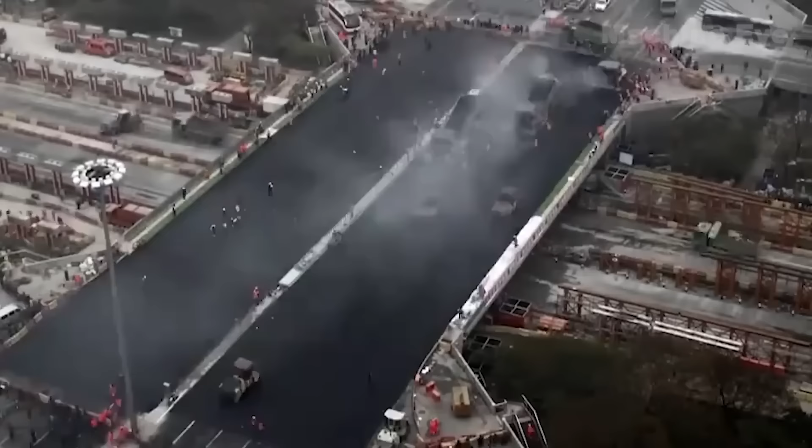The entire project took 43 hours to complete, marking the successful reconstruction of the Sanyuan Bridge. During this reconstruction, Chinese engineers skillfully utilized advanced technologies such as Beidou positioning systems, laser alignment, and infrared positioning to ensure accuracy and efficiency. Although some challenges were encountered, the project was successfully completed in the end.

The Sanyuan Bridge reconstruction project was the first time in China that a large-scale bridge replacement was completed in a single operation at an important traffic hub.

On a global scale, this level of efficiency and technological precision is even more groundbreaking. While Western countries are still debating the so-called democracy efficiency paradox, Chinese engineers have proven with the Sanyuan Bridge project what true speed and efficiency look like. As the New York Times commented, China is redefining modern governance with Tesla-style innovation in the infrastructure sector.

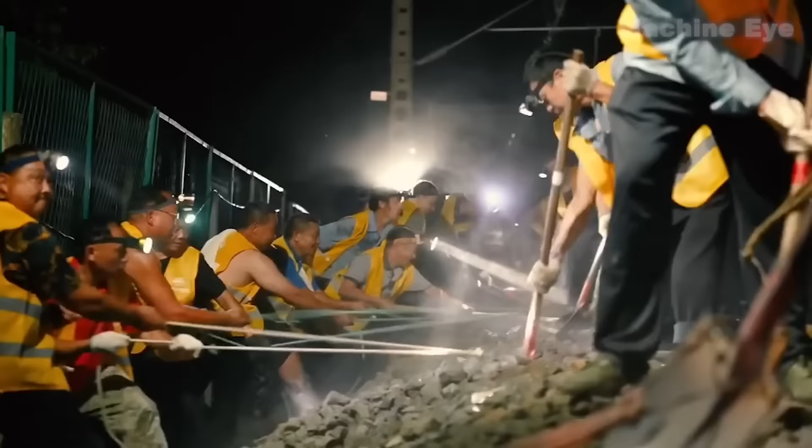Chinese engineers also accomplished the remarkable feat of building a train station in just 9 hours, sparking heated discussions and debates internationally. How do the Chinese do these things? They were able to build a whole new station in the space of 9 hours by flooding it with thousands of workers. We should be much more imaginative about getting infrastructure in, instead of condemning people to being isolated in remote areas.

Nice. When comparing construction efficiency abroad, it's easy to see why China is often called the infrastructure maniac. Take New Zealand, for example. A 300-meter subway line in the city center has been under construction for 4 years, and it's still not finished. In China, a similar project would take less than 2 years to complete.

Foreign construction efficiency often raises eyebrows. Work stops if it's too sunny, rainy, or windy. On top of that, they only work 6 hours a day, with much of that time spent chatting. In stark contrast, a skyscraper nearby, built by a Chinese team, is already nearing completion after less than 2 years of work.

This is just a glimpse of China's infrastructure prowess. Chinese construction projects are not only reliable in quality, but also unmatched in speed. For example, dismantling a flyover takes just 8 hours, renovating a high-speed rail station takes 9 hours, and building a floor of a skyscraper takes only 7 days. These feats have left engineers around the world, especially in the United States, absolutely astonished.

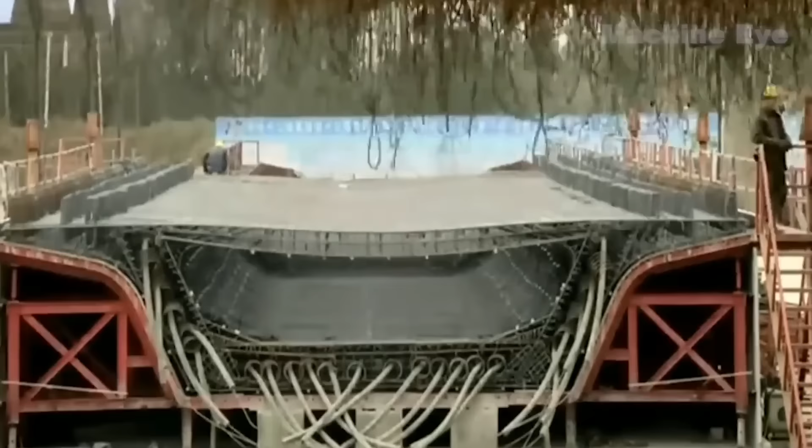So, how powerful is China's infrastructure development capability? Next, we'll explore this fascinating topic. Let's start with some striking data.

By the end of 2021, China's railway network spanned over 150,000 kilometers. Its road network reached approximately 5.28 million kilometers, and its ports boasted more than 20,000 berths for production use. The country's inland waterways stretched an impressive 128,000 kilometers. Today, China is home to the world's largest high-speed rail network, expressway system, and a network of world-class port clusters. Its comprehensive transportation network exceeds 6 million kilometers.

Behind these extraordinary figures stands a remarkable team, often referred to as the infrastructure maniac - China's infrastructure development teams. As China continues to achieve record-breaking milestones in construction, its infrastructure innovation capabilities have also seen remarkable growth. By overcoming numerous technical challenges, China has built the world's longest sea-crossing bridge, the largest water conservancy project, the highest altitude plateau railway, and the first smart high-speed railway.

Now, let's experience the scene of a Chinese high-speed train departing the station. The sound is amazing. These engineering feats have left the world in awe time and again.

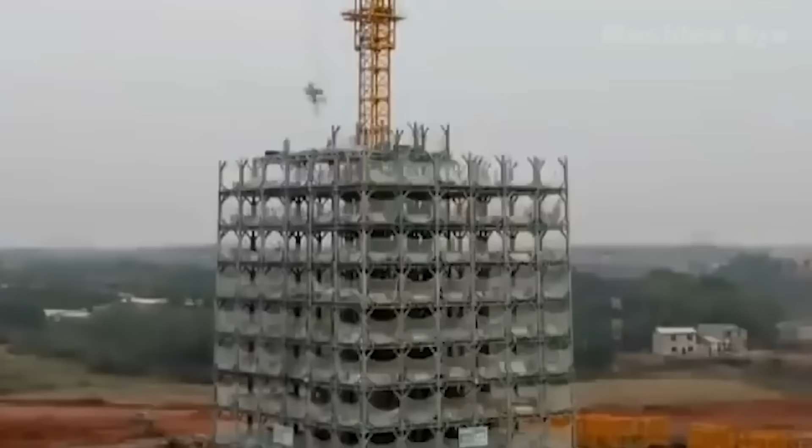From having nothing to its name, to building one floor in just 3 days, and then constructing 2 hospitals in just over 10 days during the COVID-19 pandemic, these examples highlight how China's engineering and construction technology is advancing step by step.

Starting in the 1980s, Chinese engineers embraced independent innovation, developing groundbreaking construction equipment, including the world's first air-building machine capable of adding a new floor in just 2.5 days. China mastered kilometer-level skyscraper construction techniques, built over half of the world's 500-meter-plus super-tall buildings, and 90% of the 300-meter-plus skyscrapers within the country, securing its position as a global leader in creating iconic made-in-China landmarks.

Turning to railway and highway development, before 1988, China had 0 kilometers of expressways. By the end of 2021, the total length of expressways had reached nearly 170,000 kilometers, firmly ranking first in the world. In 2008, China launched its first high-speed railway designed for speeds of 350 kilometers per hour. In just over a decade, China became the world's leading high-speed rail powerhouse.

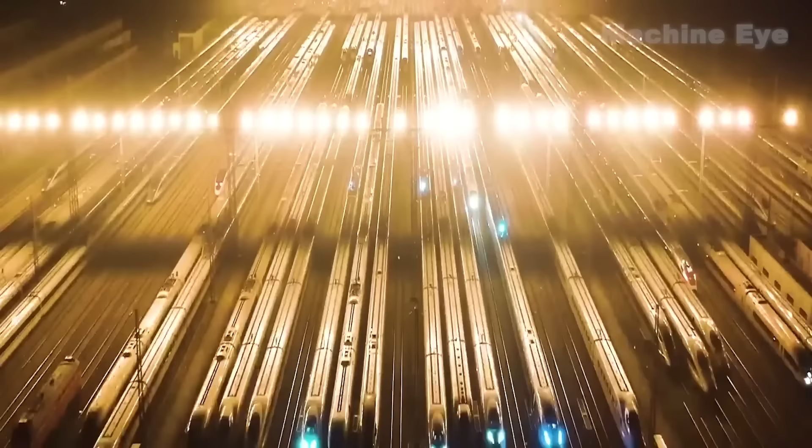By the end of 2021, the country's railway network exceeded 150,000 kilometers, with high-speed rail accounting for over 40,000 kilometers, more than 2/3 of the global total, enough to circle the Earth's equator once. Behind these transformative achievements lies the relentless dedication of Chinese engineers.

From China's first domestically designed and built railway to the world's first smart high-speed railway, over the past few decades, Chinese engineers have constructed 66% of the world's total railway length, 90% of electrified railways, 55% of high-speed railways, and 60% of urban rail projects. These achievements have written a magnificent chapter in China's infrastructure, especially in railway construction.

This is the world-renowned Chongqing Light Rail, showcasing a seamless track-switching process that's nothing short of magical. The advanced technology is truly awe-inspiring, exuding a strong sense of innovation. Even Elon Musk couldn't help but praise it, posting on his personal social media, stating, "China has incredible trains and infrastructure in general."

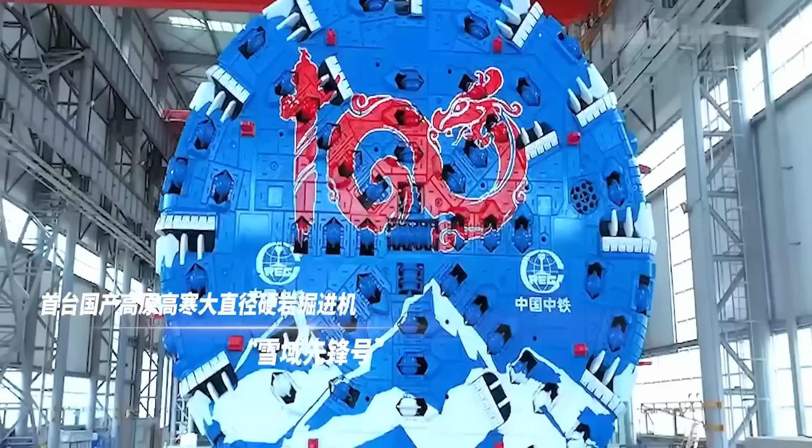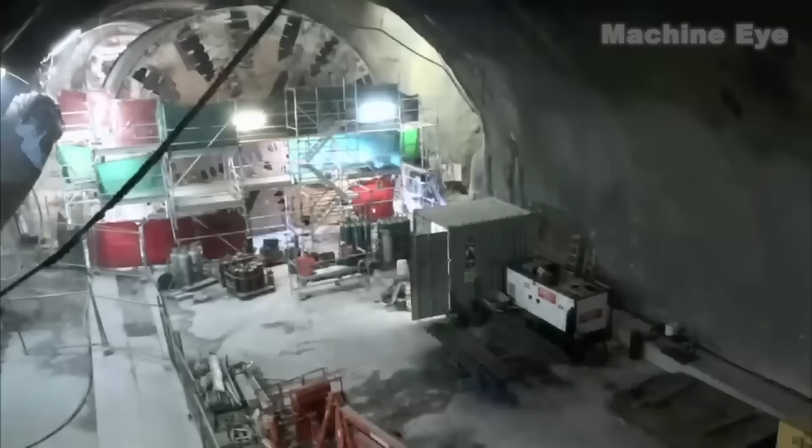Equipped with a mud-water circulation system and an innovative air cushion chamber, it efficiently manages mud pressure during excavation, preventing ground subsidence and collapse. This ensures the machine maintains a steady tunneling posture. It solves the long-standing global issue of frequent water leakage in large-diameter tunnel construction.

Many may not be familiar with how a tunnel boring machine works. Its operation is similar to how a pangolin digs burrows. The cutting head and tools function like the pangolin's front claws, breaking through soil and excavating the tunnel. The shield serves as the pangolin's sturdy back, supporting the newly formed tunnel and preventing collapses. The soil removal system works like the pangolin's hind claws, transporting the excavated material out of the tunnel. Finally, the machine's tunnel segments resemble the pangolin's scales, reinforcing the tunnel for added strength and stability.

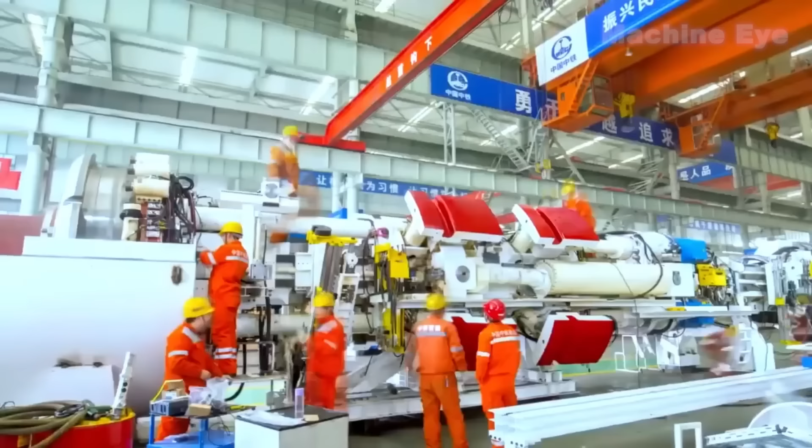Today, China's tunnel boring machines are entirely domestically manufactured, free from the constraints of foreign technology blockades. This remarkable achievement showcases the country's rapid progress in both large-scale machinery design and production. Today, these advancements surpass those of many developed nations. China is on track to rival and potentially surpass the mechanical engineering prowess of the United States and Germany.

But that's not all. China has also built the first electrified railway in Tibet, the Lhasa-Nyingchi Railway, the China-Laos Railway, a flagship Belt and Road project. The China-Laos Railway officially began operations in 2021. Starting in Kunming, China, it crosses the border at Mohan Town and extends to Vientiane, the capital of Laos. Designed for a speed of 160 kilometers per hour, the railway adopts the Chinese standard gauge, enabling seamless connectivity with China's vast railway network.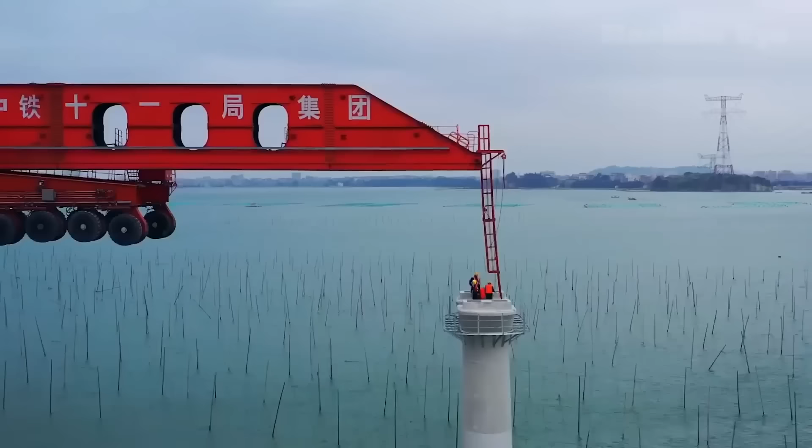The world's longest sea-crossing rail and road bridge, the Pingtan Strait Bridge, along with many other monumental projects that benefit the country and its people, while connecting the world. With reliance on technology and self-reliance, China has also developed the largest diameter shield tunneling machine, the Jinghua, and the world's first 1,000-ton bridge erection machine, the Kunlun, both marking significant milestones. Today, the Kunlun has helped complete the world's first sea-crossing high-speed railway, and the dream of taking the high-speed train to see the sea is soon to become a reality.

At the same time, CCCC has also established over 70% of national standards for the water transport industry, designing and constructing more than 80% of the nation's deep water coastal channels, with notable advantages in bridge design and construction, channel dredging, and manufacturing. Recently, CCCC has independently designed and built Asia's largest cutter suction dredger, the Tiankun Hao.

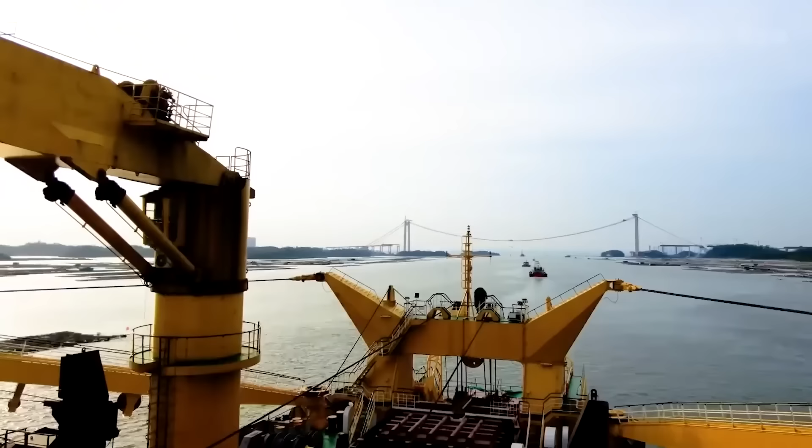The Tianquan Hao can fill an entire football field with sand in just 1 hour, with a sediment transport distance of over 10,000 meters, measuring 140 meters in length and 27.8 meters in width. It boasts a maximum dredging depth of 35 meters and a design displacement of 17,000 tons. This engineering marvel has not only broken the long-standing monopoly of Western countries but is also the largest cutter suction dredger in Asia. From spending the equivalent of 4 tons of gold to purchase dredgers from Europe and America, to now achieving technological independence, Chinese engineers and construction teams have created yet another miracle. The Tianquan Hao is primarily used for dredging river, lake, and sea channels.

Equipped with a giant cutting system at its front, it crushes seabed mud and rocks during operation. The onboard mud pumps extract the mixture, transporting it at a rate of 6,000 cubic meters per hour. This enables it to cover distances of over 10 kilometers, ensuring smooth and navigable waterways.

But its capabilities go beyond dredging. Its ability to fill a football field in just 1 hour has earned it the nickname of an island-building machine. Remarkably, within just a year of completion, it was used to construct 8 islands at sea. The Tianquan Hao represents a major leap forward for China's manufacturing industry, and it holds significant strategic importance. As a result, China has declared that this extraordinary dredger will never be sold or leased to other countries.

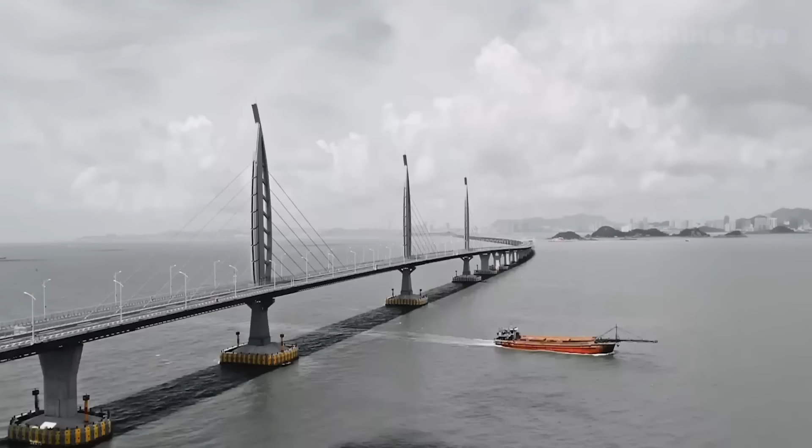The world's largest crane vessel, the Zhenhua 30, and a series of other heavy-duty national instruments, CCCC has also designed and constructed iconic projects such as the world's largest offshore container port, Shanghai Yangshan Port, and the world's longest sea-crossing bridge, the Hong Kong-Zhuhai-Macao Bridge.

When it comes to hydropower station construction, the first thing that comes to mind is the Three Gorges project. Known as the world's largest hydropower station, the construction of the Three Gorges Dam was an enormous challenge. It took nearly 80 years from the initial planning in 1932 to the official commencement in 1994, and finally, comprehensive completion in 2006.

Throughout this process, engineers had to overcome various difficulties and risks, such as diverting the flow of the upper reaches of the Yangtze River, while ensuring sufficient water continues to flow downstream. The construction of the Three Gorges Dam is a magnificent feat of the Chinese people and a model in the world of hydraulic engineering. It generates enough power in just 1 second to meet the electricity needs of an average Chinese person for over 4 years.

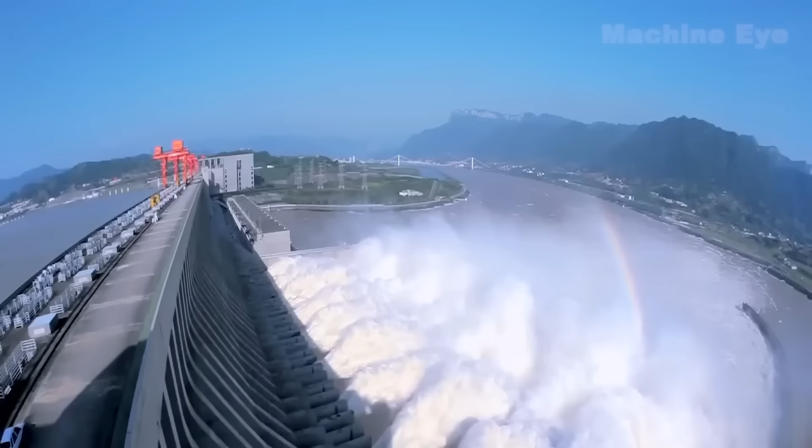China Power Construction and China Energy Construction played pivotal roles in the construction of the Three Gorges hydropower station. China Power Construction has undertaken nearly all major hydropower projects in China and built over 90% of the country's pumped storage power stations. It holds more than 50% of the global market share for hydraulic and hydropower engineering design and construction. The company has also participated in the world's largest south-to-north water diversion project, the Goupitan Hydropower Station, the highest dam in Africa at Ethiopia's Tekeze Dam, and Southeast Asia's largest hydropower station, the Malaysia Bakun Dam.

Next, let's talk about the backbone of energy construction, China Energy Construction. This company has completed over 90% of electricity planning, research, consulting, surveying, and design in China, as well as the formulation of industry standards. It has handled 80% of coal-fired power plant surveys and designs, 60% of coal-fired power plant construction, 50% of large hydropower construction, and 90% of ultra-high voltage power transmission line surveying and design.

It has also undertaken significant projects such as the world's largest wind-solar storage power transmission project, the first multi-terminal flexible DC transmission project, and the first ultra-high voltage multi-terminal hybrid DC project.

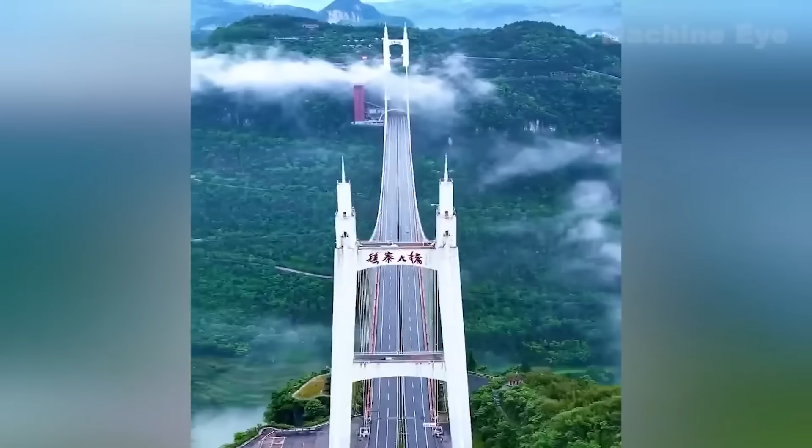Over the years, one bridge after another has risen, crossing treacherous landscapes. Railways stretch towards the horizon, providing convenience for people's travel. Chinese engineers have built China's roads, China's bridges, China's ports, China's tunnels, China's cities, and China's dams, shining national symbols that fuel the powerful momentum of China's economy.

So, returning to the original question, how strong is China's infrastructure? From skyscrapers, railways, highways, and bridges to water conservancy, energy, and industry, from transforming a train station in 9 hours, rebuilding a flyover in 43 hours, moving a railway in 5 hours, to dismantling a bridge in 2.5 hours, you must now have the answer in your mind.

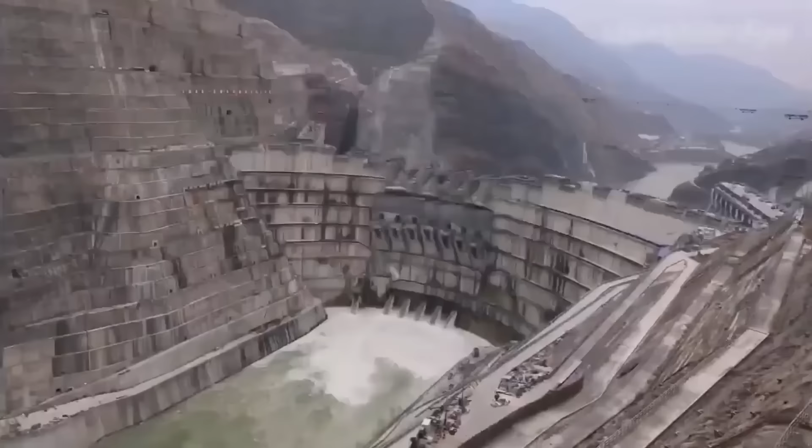The world remains the same, but China is no longer the same China. With the infrastructure powerhouse taking on the heavy responsibility and historical mission, it will continue to push forward, innovate, and drive China's giant ship steadily toward a promising future.

Chinese engineers have crossed great rivers, mountains, valleys, straits, and bays, connecting this vast country as one. Initially, China had only a 9.3-kilometer railway, a steel bridge with a main span of 63 meters, and a tunnel 261 meters long. It wasn't until 1937, when the Hangzhou-Qiantang River Bridge was completed, that China had its first self-designed

and built railroad bridge. However, to resist the Japanese invasion, the bridge's designer, Mr. Mao Yisheng, had to personally destroy it. It wasn't until the founding of the People's Republic of China that the bridge was fully repaired and rebuilt.

In 1957, the Wuhan Yangtze River Bridge was completed, allowing the Chinese to cross the Yangtze River for the first time. Young bridge engineers overcame numerous challenges, successfully designing and building the Nanjing Yangtze River Bridge. Thus, the once distant railways on both sides of the Yangtze were finally connected, giving rise to two major transportation arteries, the Beijing-Guangzhou and Beijing-Shanghai railways.

However, the span of these bridges remained limited, unable to accommodate more complex geographical conditions. It wasn't until 1991, with the completion of the Nanpu Bridge in Shanghai, that China began building large-span bridges independently.

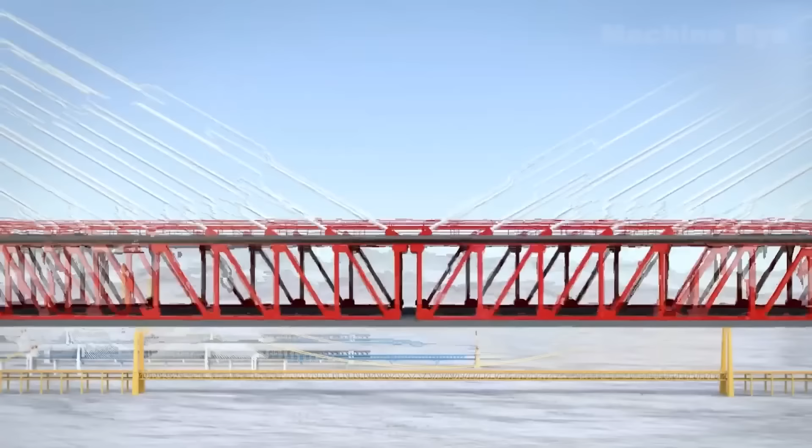Since then, China's bridges have become increasingly diverse and grand, not only spanning the Yangtze with a single arch but also soaring across canyons at an altitude of 565.4 meters. Meanwhile, underground tunnel engineering has also made remarkable progress.

It took China nearly a century to build its first 10,000-meter tunnel, but in just over 20 years, the country achieved breakthroughs of 20,000 meters and even 30,000 meters.

In the past, the Qinghai-Tibet Railway had to climb 600 meters and take 2 hours to cross Guanjiao Mountain. But today, a 32,690-meter-long tunnel allows a direct 20-minute passage through the mountain.

It is thanks to thousands of tunnels and millions of bridges that China has overcome countless natural barriers, connecting railways and highways to all corners of the country. China now has the world's largest expressway network and high-speed rail network. This fully connected China can transport 17.6 billion passengers and 46.2 billion tons of cargo annually to every corner of the world.

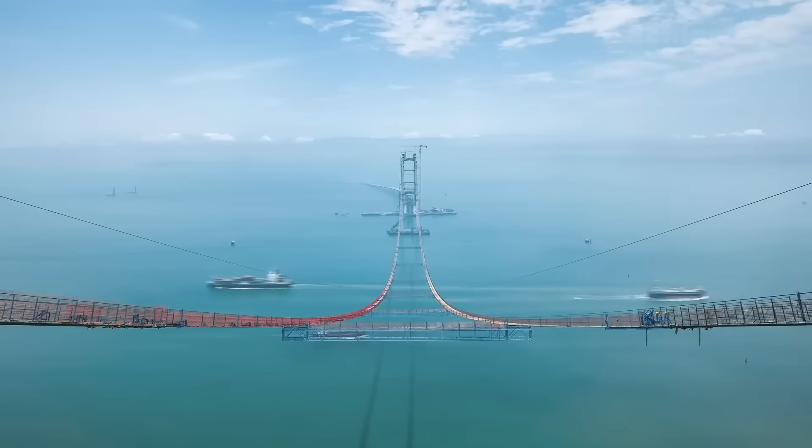Behind these vast numbers is a monumental reorganization of population and resources. Over the course of more than a century, China has connected, reorganized, and rebuilt, breaking the environmental constraints that once held back this land and creating a unique transportation network. 100 years later, the Chinese have reshaped the land.

Looking back at the past, the Chinese entered the 20th century carrying the national humiliation of the Eight-Nation Alliance occupying Beijing during the Qing dynasty. However, through the relentless efforts of generations of Chinese people, this once fractured country has finally been restored and unified.

China, a nation of resilience and determination, has always commanded utmost respect. Its hard-working people embody the essence of perseverance and dedication. Despite facing numerous challenges and enduring profound pain, they never cease to strive for greatness. China's indomitable spirit is a testament to its unwavering commitment to excellence.

In times of adversity, China's deep understanding of humanity shines bright. Their profound philosophical insights encapsulate the essence of compassion, empathy, and unity. China's philosophy of life is a boundless source of wisdom, guiding individuals toward a deeper understanding of the human experience.

With its rich history and cultural heritage, China has left an indelible mark on the world. The achievements of its people and their relentless pursuit of progress inspire admiration and awe. Their unwavering determination to make China the best resonates with the hearts of millions. China's contributions to humanity are truly remarkable.

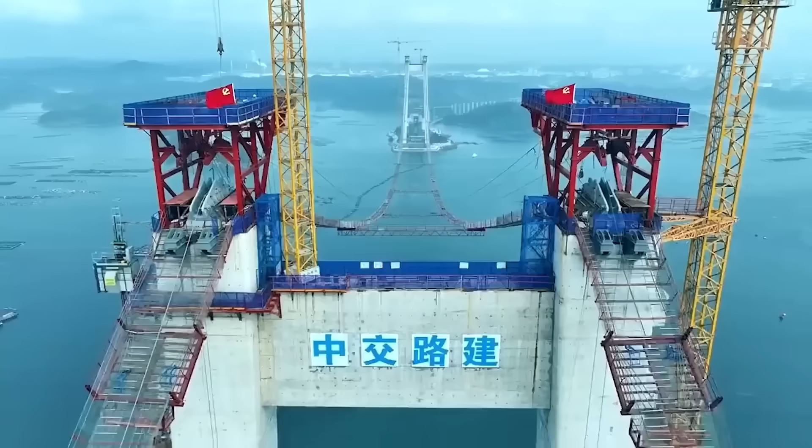From revolutionary advancements in technology and science to promoting peace and harmony in a rapidly changing world, China has proven to be a guiding light for humankind. The values ingrained in Chinese culture, such as respect, integrity, and honor, serve as a beacon of inspiration for people around the world. Let us celebrate China, a nation that continues to grow and prosper against all odds.

Let us cherish its commitment to humanity and tireless efforts to uplift both the nation and the world. China's unwavering spirit and deep understanding of humanity elevate it to a position of admiration and respect. May China continue to shine bright, leading the way toward a better and more compassionate future for all.

The journey through China's mega projects is one of awe and inspiration, a testament to human ingenuity, innovation, and the relentless pursuit of progress. Each of China's major projects showcases the remarkable feats that can be achieved when vision, technology, and sheer determination come together.

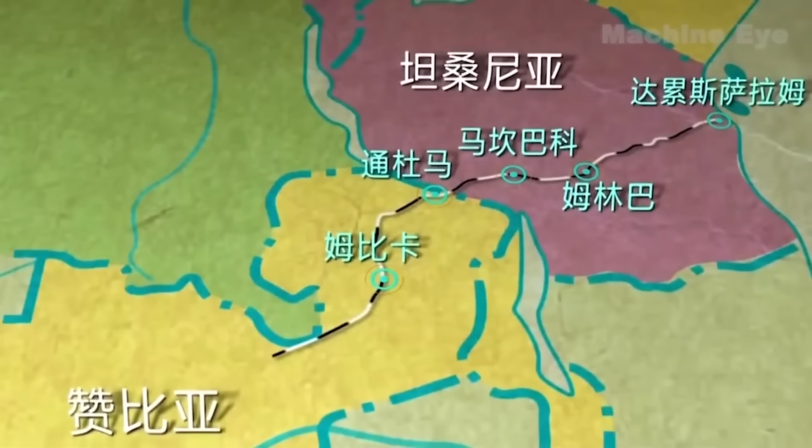With each mega project built, China continues to overcome world-class engineering challenges through innovative techniques and advanced construction methods, earning it the moniker Infrastructure Maniac. Moreover, China has undertaken major projects in numerous other countries, each emblematic of its development drive.

Behind China's global leadership in infrastructure lies not only a leap in technology, but also the support of a mighty nation. For over a century, from the devastation at the founding of the People's Republic of China, it has been the successive struggles of generations of Chinese engineers that have painted the picture of today's prosperous China.

And yet, this is not the end for China. In the future, the infrastructure maniac will continue to help more developing countries modernize, create new opportunities for development, and build a better, more livable world for all.

Each bridge, every road, and every project connects cities and countrysides, the present and the future, China and the world. Chinese infrastructure has not only reshaped the face of China, but also exemplified the strength, spirit, and speed of the nation. The infrastructure maniac will never stop.